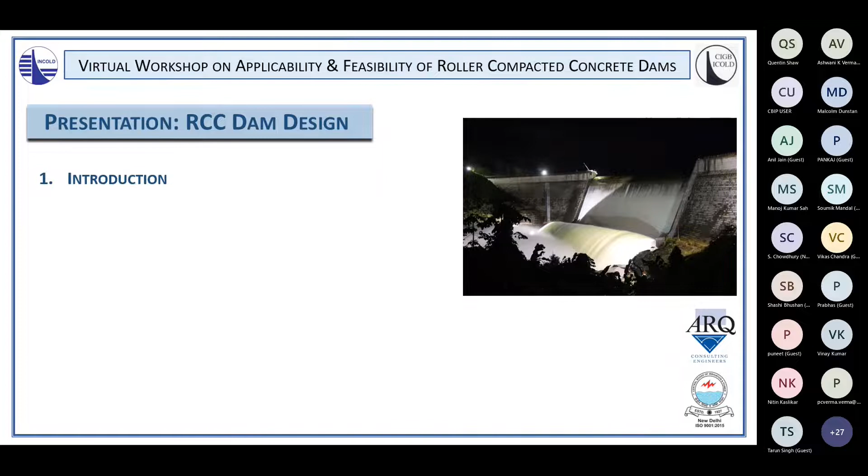My name is Quentin Shaw, and as part of the INCOLD virtual workshop on applicability and feasibility of roller compacted concrete dams, this afternoon I'm going to be presenting to you on the subject of RCC dam design. So I will start the presentation with an introduction and go on to talk about different types of RCC and different RCC dam types. I'll then talk about the critical properties for different RCC dam types and then move on to talk about the very important subject of thermomechanical analysis of RCC dams.

And I'll expand this theme to talk about stress relaxation creep, thermal effects, and temperature load issues for RCC dams, looking at the critical impacts of low stress relaxation creep in arch dams and the impacts of stress relaxation creep in gravity dams. I'll then look at developing this concept to then describe and underline the correct approach for stress relaxation creep thermomechanical analysis of RCC dams.

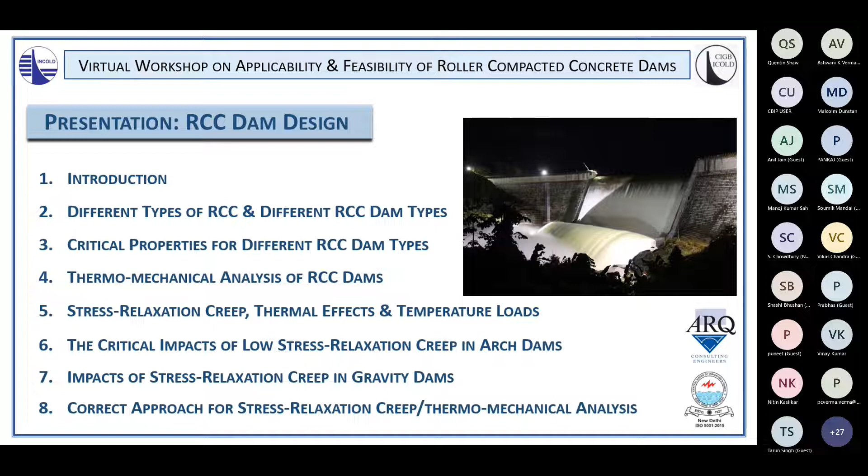We'll then change the theme a little bit and look at the important differences between RCC and conventional mass concrete dam design. And to extend the subject that I introduced earlier, I'll look at differing RCC requirements for different RCC dam types. Then go on to talk about facing systems for RCC dams, the different options. I'll look at describing in principle RCC arch dams, and then I'll bring everything together and present a summary of the success factors in RCC dam design and a general summary of the full presentation in its entirety.

An RCC dam is a type of concrete dam which requires more detailed consideration of materials and construction procedures than is the case for a conventional mass concrete dam. And it also requires a consideration of additional issues and parameters in the process of design.

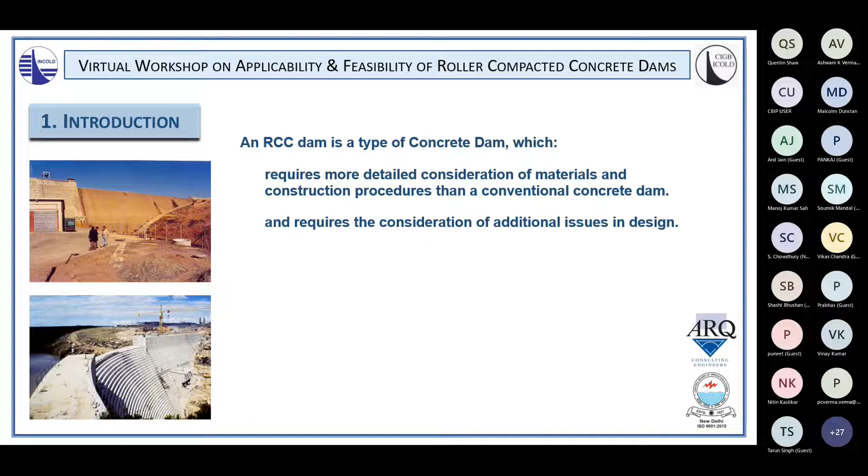So RCC dams were first built as a complete dam in the early 1980s, and by 2021 more than 900 major RCC dams were in existence worldwide, of which 83 are arch dams, so that's a little less than 10%. And of these 83, 72 are in China and 11 in the rest of the world, which includes South Africa, Panama, Puerto Rico, Laos, Pakistan, Algeria, Lebanon, Honduras, and Turkey.

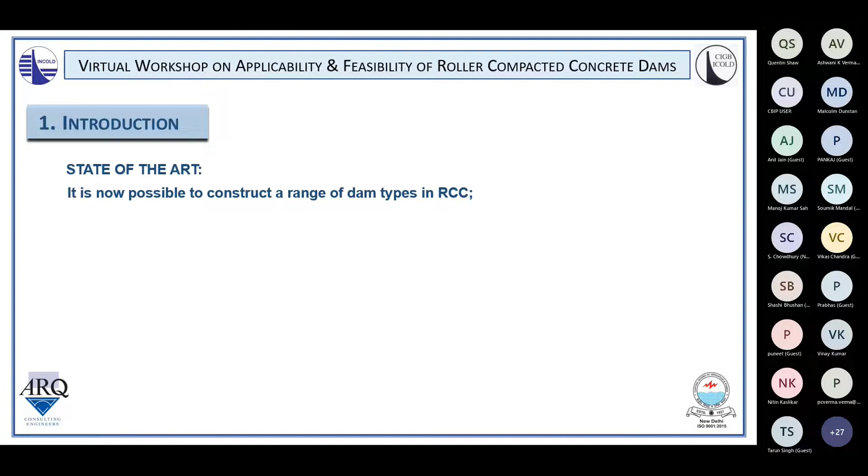In terms of the state of the art of RCC, it's now possible to construct a range of dam types in roller compacted concrete, from the low stress hard fill gravity structures, where one might typically be working with a concrete with a compressive strength of the order of 2 to 4 MPa, although usually in fact higher, all the way through to arch gravity and even thin arch dams, where the compressive strength of the concrete can quite easily be as high as 40 megapascals.

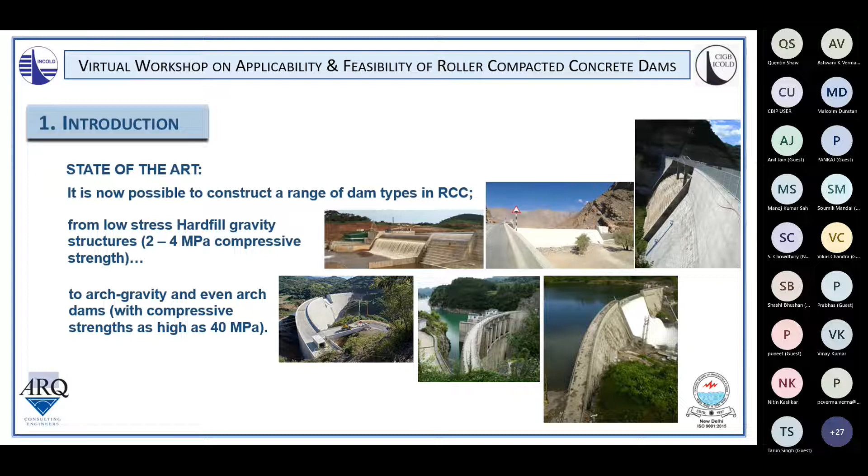And while it is true to say that RCC technology has probably reached a certain level of maturity, it's equally true to say that the technological development in RCC remains ongoing. And while this series of presentations as part of this training workshop relate primarily to Bulletin 177, there are certain aspects, particularly of this design presentation, that relate to developments since Bulletin 177.

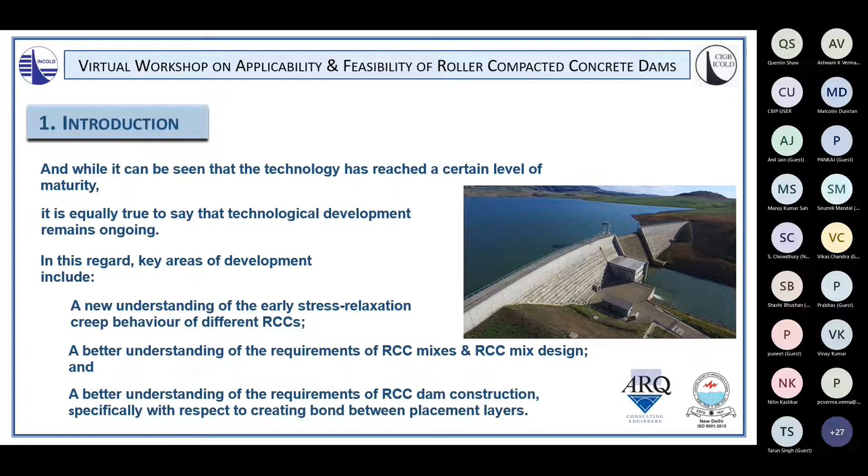So in this regard, the key areas of development in RCC include a new understanding of the early stress relaxation creep behavior of different RCC types, a better understanding of the requirements of RCC mixes and RCC mix design, and a better understanding of the requirements of RCC dam construction, specifically with respect to creating bond between placement layers.

So whereas it is true to say that the concrete strength and zoning may differ for conventional mass concrete dams of different height and for different loading conditions, the primary configuration of the structure and the method of construction remains the same. This, on the other hand, is not the case for RCC, for which quite different concrete characteristics can be created, which imply different structural forms and even different construction requirements and approaches.

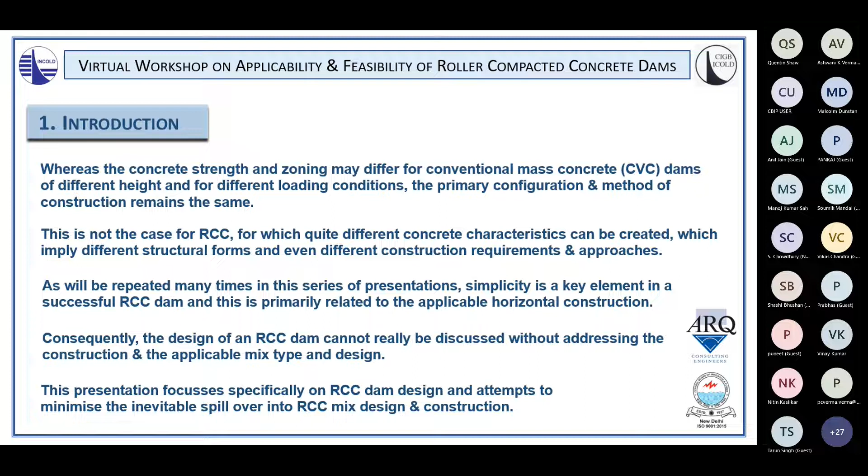So as will be repeated many times in this series of presentations, simplicity is the key element in a successful RCC dam, and this is primarily related to the application of horizontal construction. Consequently, the design of an RCC dam cannot really be discussed without addressing the construction and the applicable mix type and design. Now, this presentation specifically focuses on RCC dam design and attempts to minimize the inevitable spillover or overlap into RCC mix design and construction, although you cannot really talk about any one of these subjects without realistically addressing and including the impacts of the others.

So with RCC types of different composition and strength, different structural dam types are applicable. Starting at the bottom end, the lowest cementitious materials end, for symmetrical section hard fill or CSG dams, or as they're now called cemented materials dams, a very low cementitious material content can be used, as low as 60 kilograms a cubic meter. Realistically, this is the sort of material that was the origin of roller compacted concrete dams, and the symmetrical hard fill configuration was at that very origin as well.

Realistically, this was a hearting material with very low strength requirements. And a zero bond between the placement layers is a critical factor of this type of roller compacted concrete. And impermeability must be created by a separate element on the upstream face. Now, this mix type will give a zero vertical tensile strength, and consequently the dam type is not realistically suited to regions subject to high seismicity.

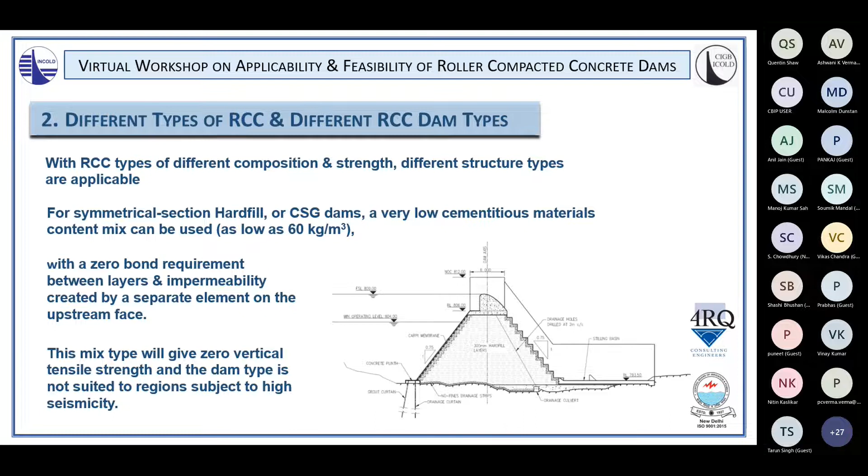The next step on the cementitious materials scale is low cementitious RCC, or LCRCC, which is an RCC containing less than 100 kilograms per cubic meter total cementitious materials. And mixes of this type can typically take two forms. A more modern variant will indicate a very high non-cementitious fines content with a total paste content of between 210 and 240 liters per cubic meter.

And in this regard, it's particularly important to understand the differentiation between cementitious paste and total paste. In modern RCC dams, total paste is the critical element. Cementitious paste involves cementitious materials, water, admixtures, and air, while total paste is the cementitious paste plus the non-cementitious fines that come from either crusher sand or manufactured dust, milled rock.

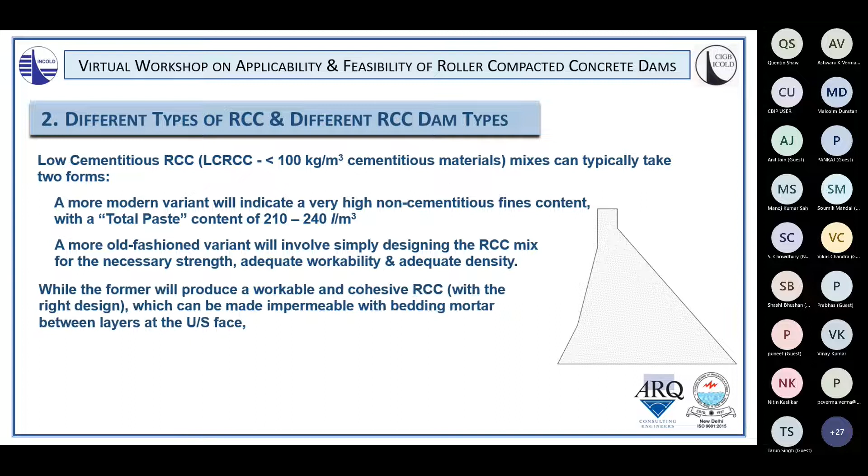On the other hand, there's a more old-fashioned variant of LCRCC, which will involve simply designing the RCC mix for the necessary target strength, adequate workability, and adequate density. While the former RCC type will produce a workable and cohesive mix with the right design, which can be made impermeable with bedding mortar between the layers in the zone of the upstream face, the latter will typically produce a mix that segregates during construction and will require a separate upstream membrane or element for impermeability. So in all cases of LCRCC, a broader dam section and a lower stressed structure is required.

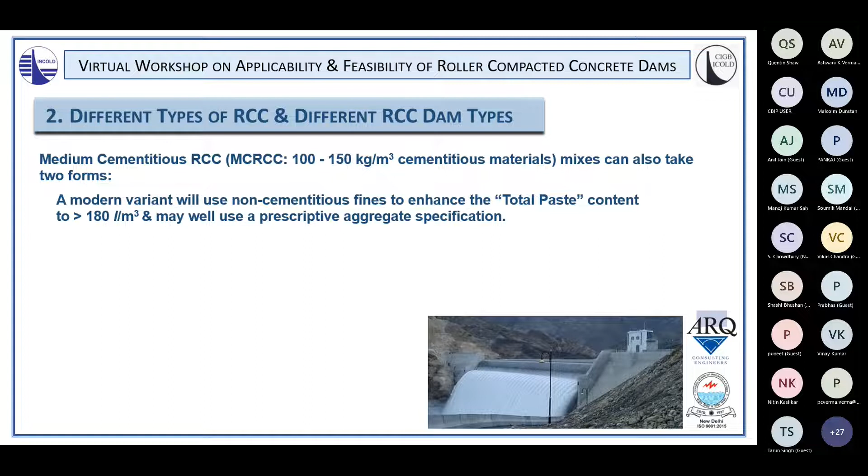And next we come to medium cementitious RCC, MCRCC, which is a mix containing between 100 and 150 kilograms per cubic meter of total cementitious materials. And this can also take two forms. A modern variant will use non-cementitious fines to enhance the total paste content to somewhere in the region of 180 liters per cubic meter, with this low level of paste requiring a prescriptive aggregate specification. And then you have the more old-fashioned variant again, which involves designing the RCC mix for the necessary strength, adequate workability, and adequate density.

Now, due to the improved understanding of RCC mix requirements, the use of the former mix type is increasing and the latter type is decreasing, with the former producing workable, impermeable RCC. However, a limitation of this RCC type is that it will not realistically allow high levels of interlayer bond. Tensile strengths are not really much more than 1 MPa and cohesions not more than 1.25 MPa. Consequently, this RCC type is best suited to lower stressed gravity dam configurations.

Then at the top of the scale, we have high cementitious RCC, HCRCC, which is a mix containing more than 150 kilograms per cubic meter total cementitious materials. These mixes typically take a single form, a high workability, cohesive mix with total paste content greater than 180 liters per cubic meter, and often using a prescriptive aggregate specification. Without that specification, the total paste requirements are somewhat higher.

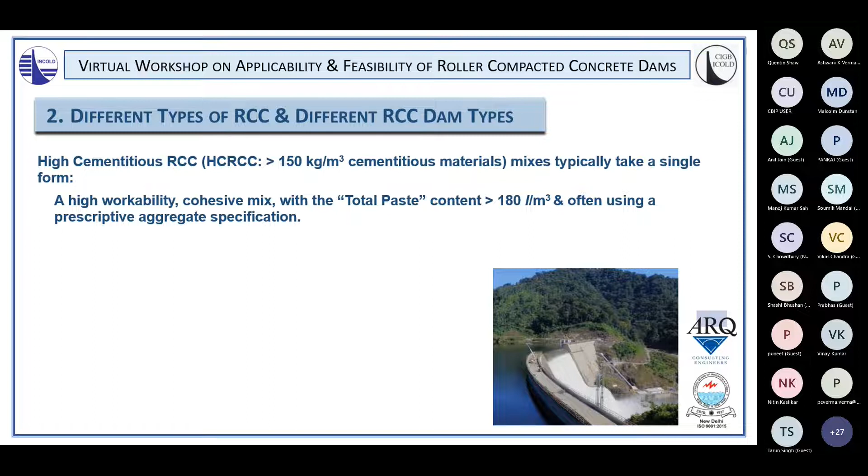And usually a set retarding admixture will be used to extend the initial setting time of this type of RCC to approximately 24 hours. And the concrete is then described as a super retarded high workability RCC. This approach allows a maximization of hot joints, which maximizes interlayer bond.

And even so, a design limitation exists in a maximum sustainable vertical tensile strength of the order of 1.5 MPa, which can be compared to a number of over 4 MPa for a conventional mass concrete. Nevertheless, this type of RCC is suited to higher stress structures, including arch dams, but also offers constructability benefits. So in some instances, this RCC type is selected because of its constructability advantages and because of its good bonding

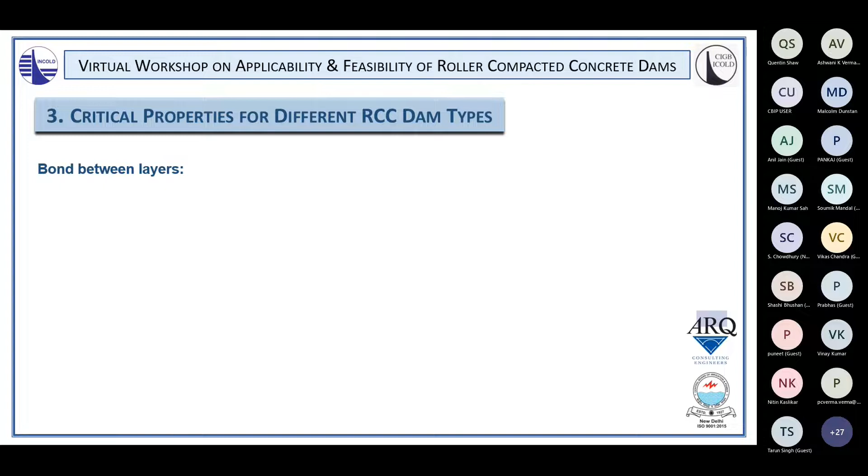between placement layers. And if we look at the critical properties for different RCC dam types, the first critical property, or the overall property, is the bond between the layers, and this in the form of tensile strength, shear strength, particularly joint cohesion, and permeability. So this really defines our bond between the successive placement layers.

And when we're talking about the typical properties that can be realized for each of the RCC types that define the criteria for the design of the different RCC dam types, we can look at these following properties, although we have to say that it's always necessary to verify these properties through testing. So what I'm going to give you here are just typical ranges of applicable properties.

So when we're looking at hard fill, at the low cementitious end of the spectrum, realistically a tensile strength between layers of 0, a shear strength, depending on the nature of the aggregates particularly, of between 37 and 50 degrees, and realistically a cohesion of 0. Permeability, you have to expect permeability along the joints between layers in a hard fill type of structure.

So with low cementitious RCC, we have a situation with tensile strengths typically assumed as 0 where no bedding is used, and maybe as much as 0.5 MPa at the top end when bedding might be used. Shear strengths will typically be friction angles of between 37 and 50 degrees, and cohesions between layers would not realistically be more than 1 MPa, and that number could be as low as 0 when debonding between layers is observed. This will give you a permeable RCC matrix unless bedding is included between the placement layers, in which case impermeability can be created.

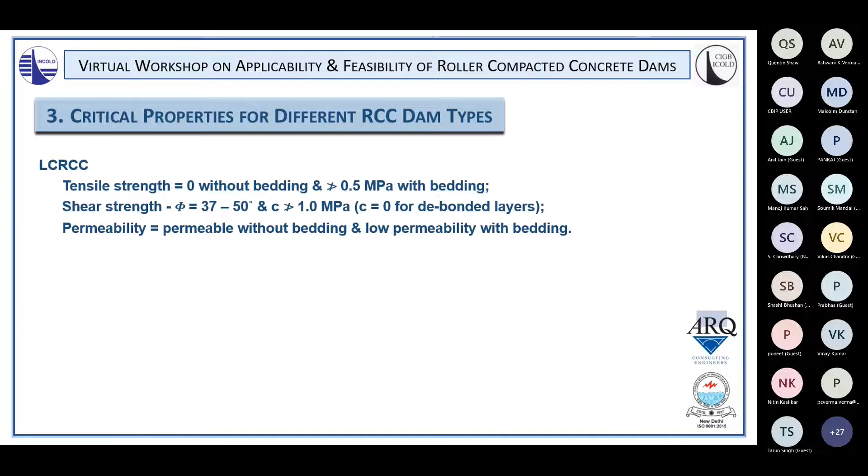The medium cementitious RCC, tensile strengths between typically 0.3 and 1 MPa, depending on the mix approach and the use of bedding between layers. Shear strengths for this with friction angles of the order of 40 to 50 degrees, and cohesions limited to perhaps 1.25 MPa. On the older type of this mix, you'd be looking at partly permeable, and realistically you wouldn't be able to be certain of impermeability without a bedding layer between the placement layers, but a modern mix can be designed in this type of RCC for impermeability.

The top end, the high cementitious RCC, tensile strength, as mentioned, realistically a maximum of 1.5 MPa, and this will depend again on the mix type, the amount of paste, etc., and the use of bedding. Shear strengths typically between 40 and 50 and even more friction angle, and cohesion of more than 2 MPa. And this type of RCC will be designed generally for impermeability.

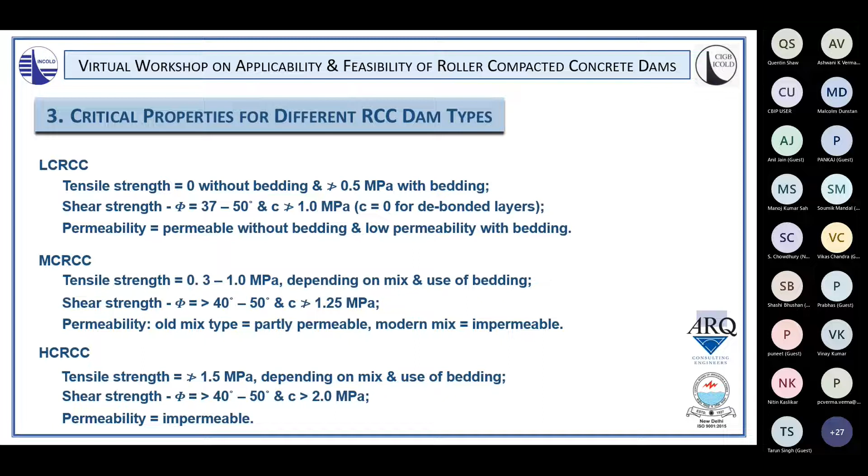Now, a particular issue that has some relevance to our RCC dam design is guidelines that have been written into the ANCOLD 2013 guideline on the design criteria for gravity dams. And while these aren't necessarily applicable anywhere outside Australia, it's extremely interesting to see that a fraternity of dam engineers have placed these requirements and constraints on particularly low cementitious RCC.

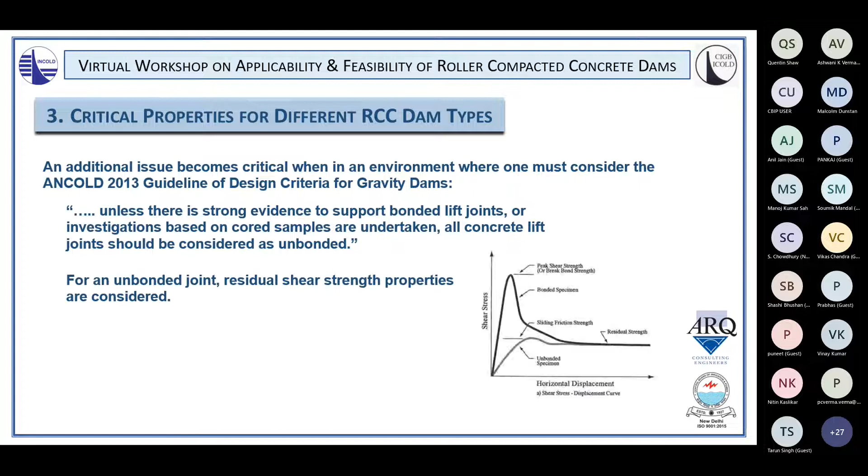And these state that unless there is strong evidence to support bonded lift joints or investigations based on core samples are undertaken, all concrete lift joints should be considered as unbonded. And for an unbonded joint, residual shear strength properties should be considered. Furthermore, the shear strength properties to be used should be exceeded by 80% of all test results. So these requirements imply the need for a very significantly heavier section in the case of a lower cementitious RCC dam, where a majority of unbonded lift joints can realistically be expected.

So this has a big impact because a lot of RCC dams will not have been designed with this principle in mind. So moving on to talk about a very important subject of thermomechanical analysis of RCC dams.

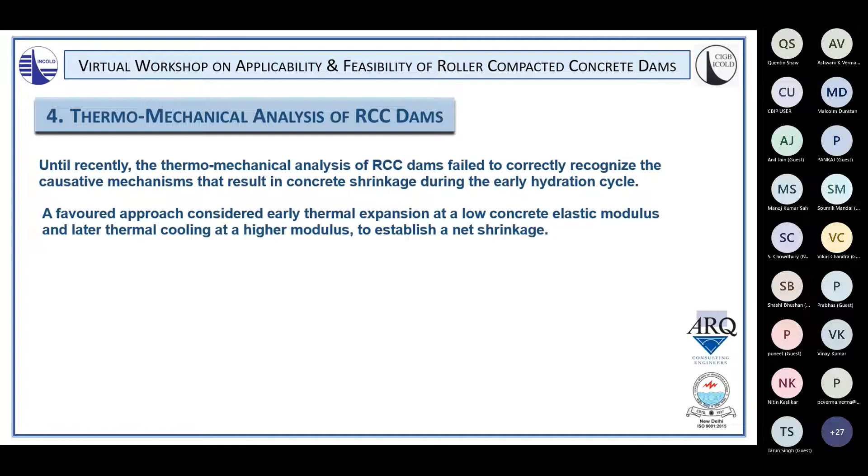Thermal expansion at a low concrete elastic modulus, and later thermal cooling at a higher concrete modulus, with basically the difference creating a shrinkage of that concrete. But this approach actually resulted in a misinterpretation of the actual behavior of the concrete. And stress relaxation creep that occurs during the hydration cycle was assumed to be a function of the nature of the concrete and the hydration temperature rise. And this was applicable essentially for all approaches used for the thermomechanical analysis of all concrete dams, essentially.

And in fact, it's been demonstrated that stress relaxation creep is a stress-dependent function. So it's not just dependent on the nature of the concrete, and it will be different with different natures of concrete, as in conventional concrete, roller compacted concrete, and roller compacted concrete with different cementitious materials compositions and contents. It will vary with that, but it's not so much the hydration temperature rise that influences the extent of stress relaxation creep, but rather the extent of restrained thermal expansion. So stress relaxation creep during that hydration process is actually a stress-dependent function. It's not a temperature-dependent function. It's about thermal expansion and how much that thermal expansion is actually restrained from occurring.

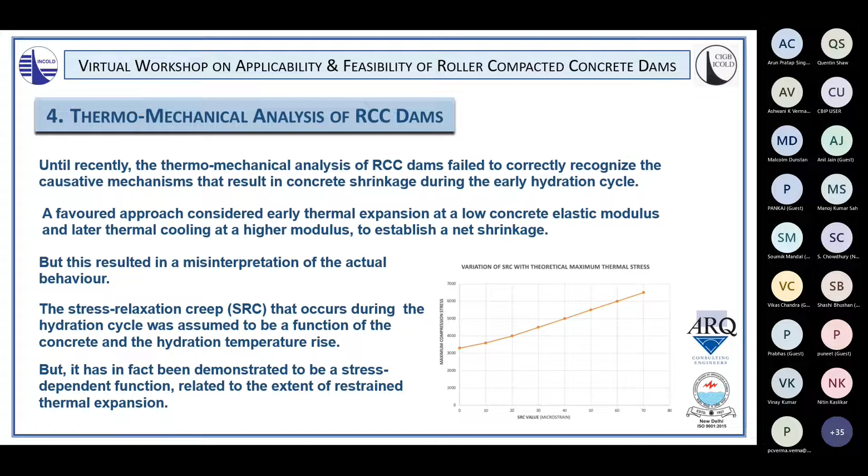So looking now at stress relaxation creep, thermal effects, and temperature loads, research and analysis on a number of RCC dams, including, importantly, 2 arch dams, revealed very different levels of stress relaxation creep in different RCC types. From an effective 0 stress relaxation creep on 2 arch dams, and notice the point effective 0, I'll explain that later. So from 0 on 2 arch dams to well in excess of 100 microstrain in the case of lower workability, low cementitious RCC. And this is particularly relevant because this RCC might have had an adiabatic hydration temperature rise of the order of 7 to 8 degrees. So in fact, even more than the temperature equivalent of the hydration temperature rise was seen in the stress relaxation creep in this particular low strength RCC type.

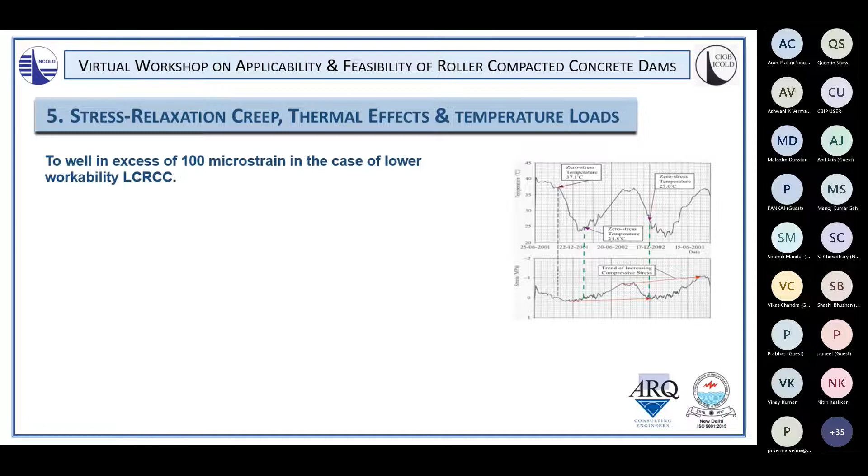Additionally, very low stress relaxation creep was demonstrated to increase surface gradient at cracking. Now this implies that the generic approach that was developed, such as maximum thermal gradients of 20 degrees between internal and external zones, was developed for conventional mass concrete on the basis of the typical performance of conventional mass concrete. What we're seeing in RCC is different: in low stress relaxation creep RCC, a greater sensitivity to these gradients exists. However, unlike conventional concrete, when a crack occurs in the surface of an RCC dam, that crack doesn't tend to propagate upwards. In conventional concrete, it does. It's very difficult to stop that crack. In the case of RCC, placing a warm RCC on top of that crack typically seals it again, and the problem of propagating cracks doesn't occur.

Particularly low stress relaxation creep was established in fly ash rich, high workability RCC, to the extent that expansion during construction was actually measured at Changuinola 1 dam. So the graphics shown here were measured at strain gauges across the joints at an elevation approximately 10 meters below the crest level, a little bit more, and on the upstream side, so several meters from the upstream face. What was established was that for the placement above those gauges, a linear expansion on those gauges was determined, which occurred until the horizontal construction was completed. So in other words, at the level of the spillway crest, it just stopped and disappeared.

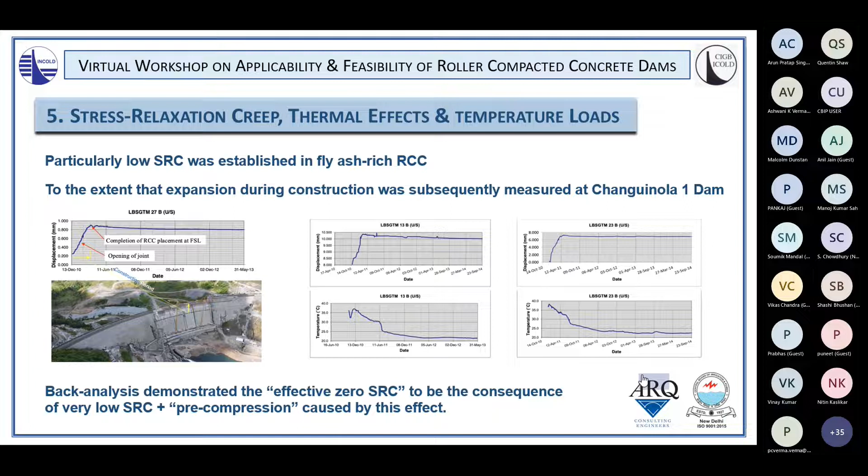So for the continuous horizontal construction above for the non-overspill crest, there was none of this expansion. It only occurred as concrete was placed fully from abutment to abutment horizontally. It happened linearly and stopped. And to the extent on those gauges of indicating an expansion on the upstream side of the order of 72 microstrain.

And back analysis demonstrated the effective zero stress relaxation creep that was seen in these arch dams is actually a consequence of, first of all, very low stress relaxation creep and this pre-compression effect with the actual arch crest getting longer. So it's a combination of these two things, low stress relaxation creep and this pre-compression of the crest getting longer as it's being built. And in fact, that only happens because of the low stress relaxation creep. So as the structure becomes more flexible with height, its containment of the thermal expansion is less, and therefore it is actually physically able to expand. So because of the low stress relaxation creep, you get this combination of two things that give us this overall effect of zero stress relaxation creep.

So what is stress relaxation creep? Well, let's start looking at this with our typical temperature time curve for concrete in the core of a dam structure. So we have our T1, which is the placement temperature, T2, the maximum temperature during hydration, T3, which is the zero stress temperature, and T4, which is the final coldest temperature during an equilibrium cycle after all the hydration heat has been dissipated. So the tricky one here is our T3.

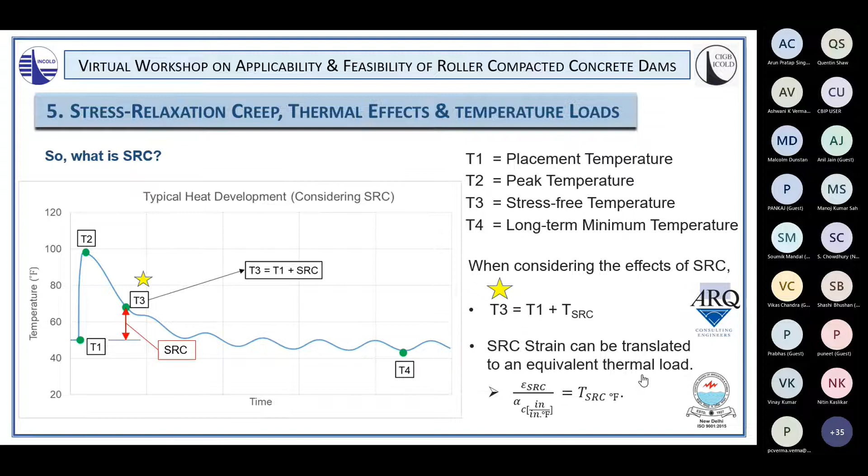creep. And when I say SRC, stress relaxation creep strain can be translated to an equivalent thermal load. So we have a temperature equivalence or a strain equivalence of that stress relaxation creep. Then let's look in more detail at stress relaxation creep.

So as cementitious materials hydrate, the product of the reaction is smaller in volume than the constituent components. So the product of the hydration gel is smaller than the cementitious materials and water, air, etc. that are the components of the reaction. And this is called chemical shrinkage. However, as the paste gains strength, not all chemical shrinkage translates into physical shrinkage. And the physical manifestation of the chemical shrinkage is seen as autogenous shrinkage of the mortar or the concrete.

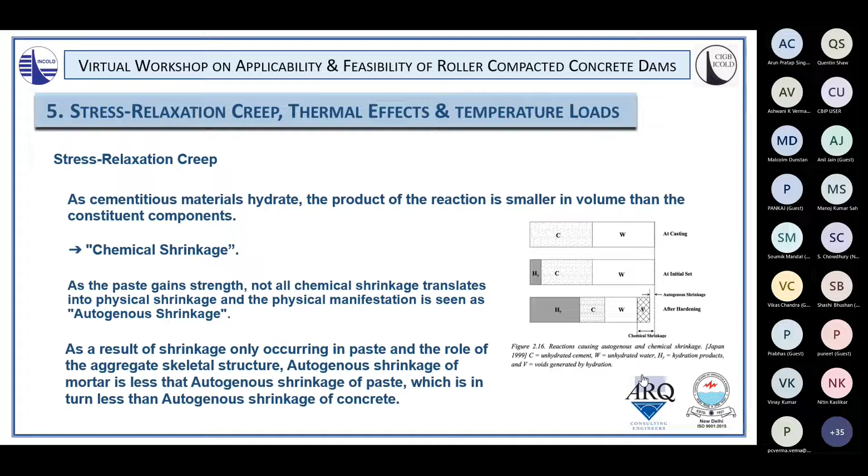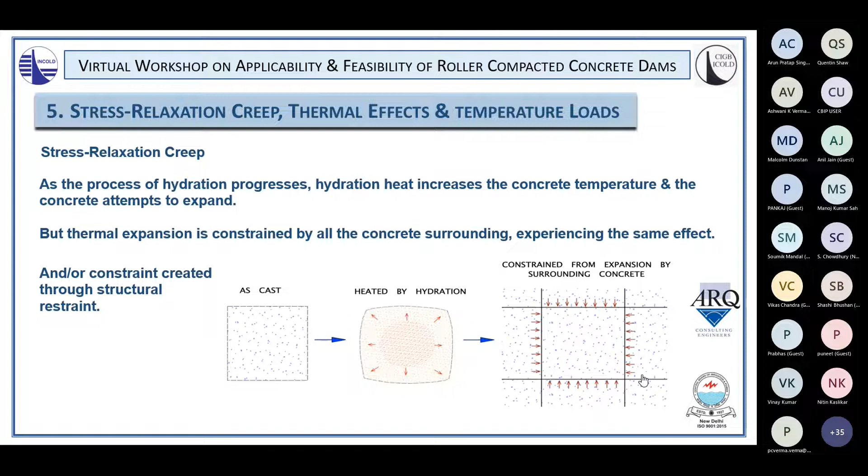So it's a completely different structural constraint up at the top of the dam compared to at the base, particularly in the case of an arch gravity dam. So let's look more deeply into the mechanism that is stress relaxation creep. So as concrete is expanding due to increased temperature, but is constrained by material doing exactly the same thing surrounding it, that concrete experiences compression stress.

Under this compression stress, the immature concrete experiences creep through which that compression stress is relieved or relaxed, and hence the name for this type of creep: stress relaxation creep. And one credible theory that has been advanced to understand what is happening in this process considers the fact that the immature concrete under compression experiences a situation where moisture is squeezed from the micropores in the paste into the macropores.

So these macropores are caused by chemical shrinkage and autogenous shrinkage. The difference between the chemical shrinkage and the autogenous shrinkage takes the form of macropores being created within the paste. And as that paste then experiences compression, moisture from the micropores is squeezed into these voids that are the macropores, and in that process, the paste within the concrete structure collapses a little bit and relieves the compression stress that it's otherwise experiencing, and in the process shrinks.

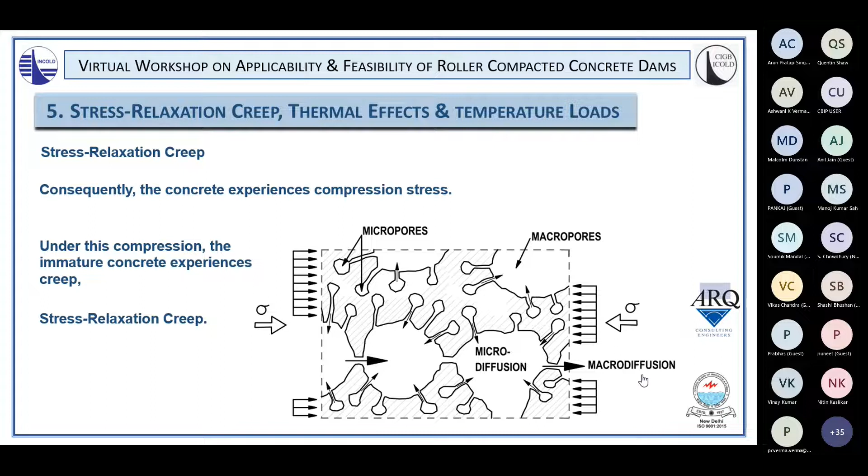And now if we look at stress relaxation creep in relation to roller-compacted concrete, in terms of the structure of the concrete, and particularly a higher workability RCC, the process of compaction under roller action really involves squeezing the aggregate skeletal structure together and releasing paste up to the surface. This is very different and results in a very different skeletal structure compared to conventional mass concrete. One picture that I use to describe this difference is imagining conventional concrete as aggregate in a soup of paste, whereas RCC is a skeletal structure of aggregates with paste in between. And the lower paste content and better developed aggregate skeletal structure that you get in roller compacted concrete through the action of roller compaction implies workable RCC is less susceptible than conventional mass concrete to autogenous shrinkage and early age stress relaxation creep.

So from one side, because the problem that happens in autogenous shrinkage, etc., is in the paste, and because there is less paste in an RCC than is the case with most conventional mass concretes, there is less actual direct effect of the autogenous shrinkage, number one. And number two, because the skeletal structure is better established through roller compaction, the overall structure of RCC is less susceptible to the stress relaxation creep that would more easily occur in conventional mass concrete.

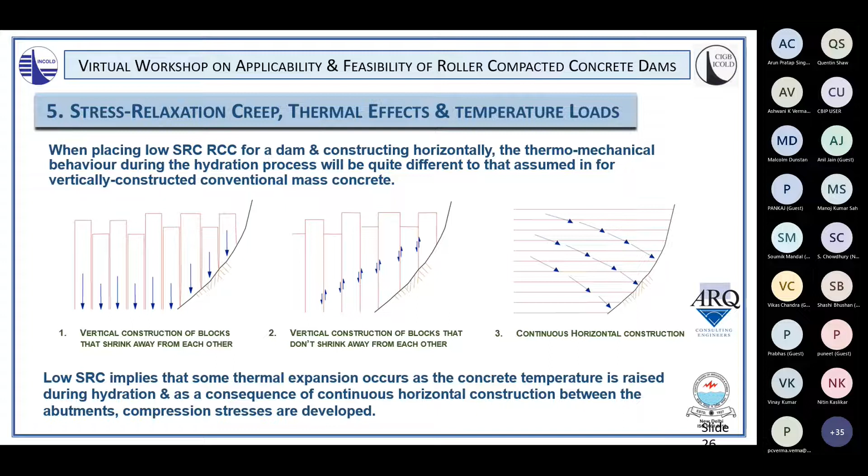Now let us look at the impact of low stress relaxation creep, starting specifically with arch dams. Due to the natural configuration of an arch or an arch gravity dam, the arches become longer and thinner in section with increasing elevation, and accordingly increasingly flexible with height. So the structure of a dam at its base, in terms of lateral stiffness, will be much stiffer than is the case right at the crest of the dam. Not only at the bottom is the length and width more similar, so we've got a squarer block, but we've got the restraint of the foundation. As we go further up, the dam structure becomes longer and thinner, and remember, any expansion will tend to push the dam upstream.

So even the rigidity of the arch against load in a downstream direction is not applicable, because we're actually working with forces that will increase upstream movement. So the dam becomes much more flexible with height, and consequently expansion due to thermal temperature rise increases with height, causing the structure to lean progressively further upstream and resulting in the arches effectively, and in reality, being constructed progressively longer with increasing dam height.

And this effect is equivalent to an extension of the arch at the crest level, on structures of between 70 and 100 meters in height, of the order of 50 to 70 microstrain, which implies that 50 to 70 microstrain of thermal shrinkage can actually happen in that arch crest before it effectively experiences any temperature drop load.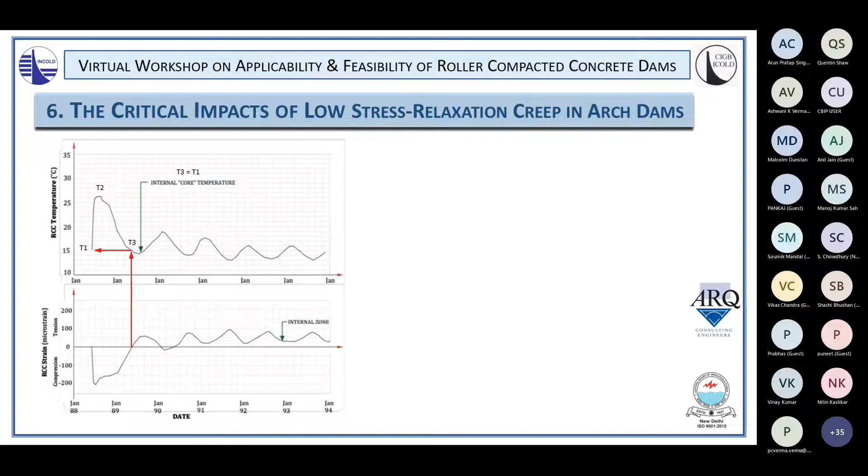Now, as can be seen on these graphs from the Knellpoort Dam, the strain passes through zero at the point that the temperature T3 is pretty much the same as T1. So our T3 is equal to T1. And remember back to our earlier curves, where in conventional concrete dam engineering, T3 is in fact equated to T2 rather than T1. And bearing in mind that our stress relaxation creep is equal to T3 minus T1, if T3 is equal to T1, that means we have a situation of zero stress relaxation creep.

And the final mass gradient structural temperature drop load will obviously then be substantially lower, essentially being T3 or T1 minus T4, rather than what would effectively have been in conventional concrete dam engineering, T2 minus T4. A very important structural difference in terms of temperature drop load on this dam type.

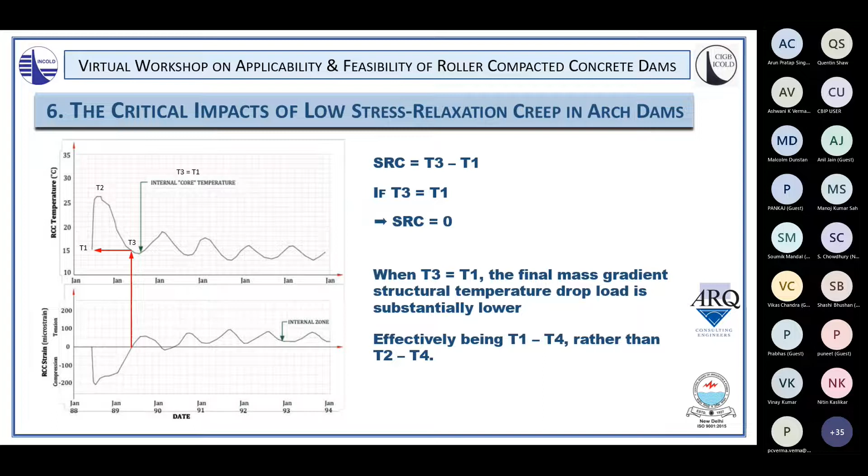Illustrating this point again, just for clarity, we have our graph T1, T2 and T4. For conventional concrete, our T3 is either set at T2 or a degree or two below T2. So our total temperature drop in a dam with grouted joints is large, being approximately T2 all the way down to T4. Now, if our T3 is substantially lower, equivalent to T1, then it becomes very evident that the long-term structural temperature drop load on the dam is much, much lower.

And it's very relevant to make a statement in terms of understanding of how arch dams work. In these situations, in the winter temperature loading, the displacements downstream associated purely with temperature from a cold winter are typically pretty equivalent to the maximum displacements related to the water load. So we can see that these effects are quite large. And with this reduction of the T3 value, it's very obvious that we're creating very strong opportunities for RCC arch dams whereby we do not need to grout joints.

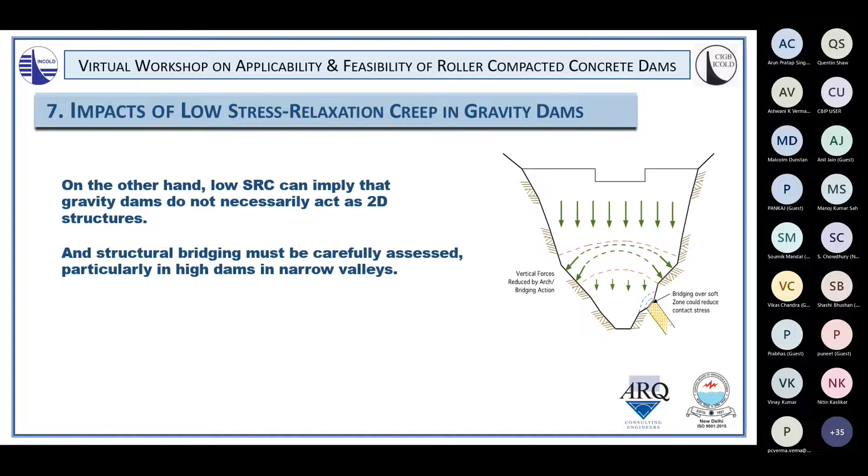Now moving on to what this means on gravity dams. So great opportunities in terms of arch dams, but negative effects in terms of gravity dams, because low stress relaxation creep can imply that gravity dams do not necessarily act as two-dimensional structures. Structural bridging must be carefully assessed, particularly in high dams in narrow valleys, or where zones of weak material are present in the foundation, because literally we create a bridge across those zones and potentially don't have a contact pressure between the dam and that foundation in these places.

That contact pressure can be less than the hydraulic pressure, and if we have an erodible material on a contact, this can obviously result in very serious erosion beneath the dam. Consequently, analysis requires very careful structural evaluation of the dam structure under gravity and thermal loading. So our thermomechanical analysis must very carefully consider the process of construction and subsequent loading.

Without a benched foundation on a steep abutment with a lower strength rock mass, the extremes of the dam may slide down as the hydration heat is dissipated. What would normally happen in a gravity dam is that each of the blocks would carry their own load vertically and they will shrink away from each other. But because of the thermal expansion that we have and the low stress relaxation creep, we actually create a situation where we lift our dam. So the top piece that we're putting on is sort of stretched over this lifted area. And as that lifted area cools and shrinks back down, it will pull the sides of the dam down the abutments. So those flanks of the dam must be designed to be stable on their own abutment.

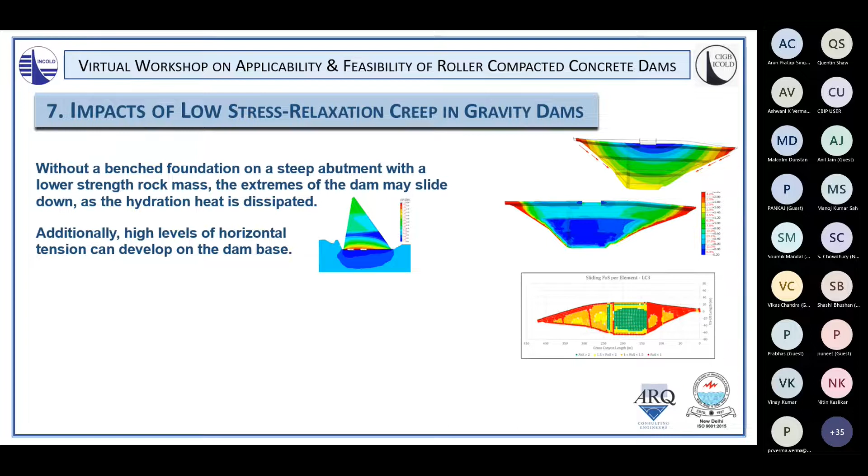Additionally, on a lower deformation modulus foundation, higher levels of horizontal tension will develop along the dam base. It's very similar to the concept of a rigid beam on a flexible foundation. It can be necessary to bench the foundations and provide distinct joint systems to ensure debonding of all of these joints. Not so much in the central and lower section of the dam, but in the upper abutments. And this must be looked at very carefully in even the design of gravity dams.

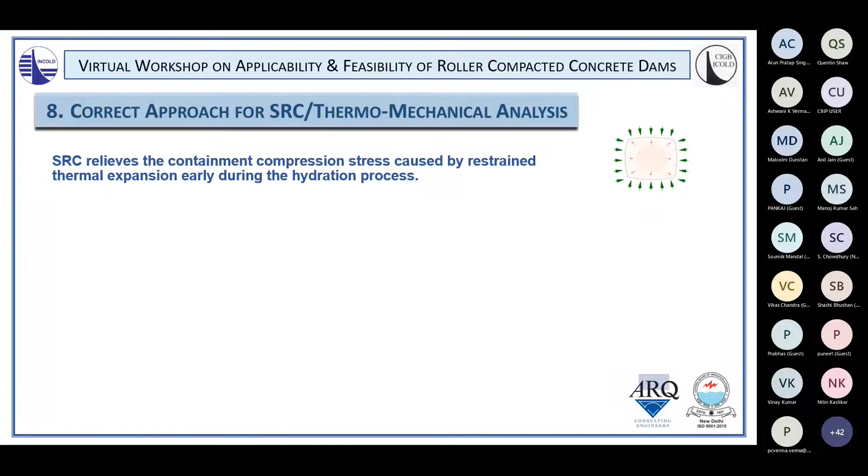Now, raising all these issues about stress relaxation creep and thermomechanical analysis, we need to really talk about what is the correct approach for stress relaxation creep and thermomechanical analysis. Stress relaxation creep relieves the containment compression stress caused by restrained thermal expansion early during the hydration process. Creep can only occur once the hydration process creates micropores and macropores in the gel to allow the migration of moisture. Until that point, it's basically like compressing a fluid.

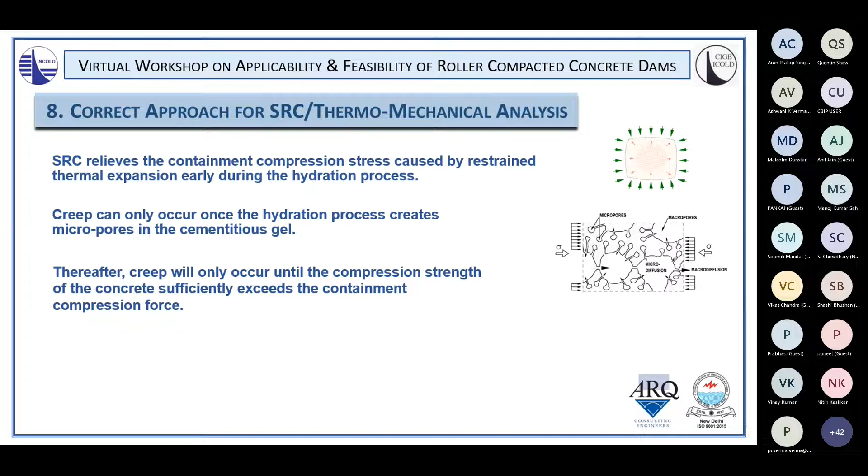But thereafter, creep will only occur until the compression strength of the concrete sufficiently exceeds the containment compression force. In the same way as autogenous shrinkage is a lesser form of chemical shrinkage, which stops once the paste has sufficient strength, a similar effect will occur in the stress relaxation creep in concrete. Once the concrete has gained sufficient strength, it will be able to resist those compressive forces and the creep will not continue. So at the beginning of the hydration process, the RCC will act more like a contained liquid, and only as the hydration gel shrinkage occurs, simultaneously with thermal expansion, will the susceptibility to stress relaxation creep start to develop.

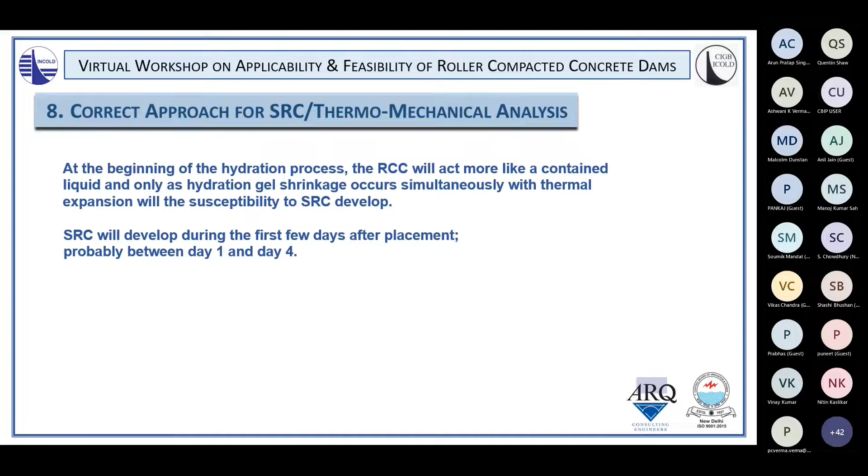Stress relaxation creep will develop during the first few days after placement. This is probably something that happens between day 1 and day 4, obviously depending on the particular mix, but it's occurring in this very early period. Determining the temperature rise on the 4th day throughout an entire dam structure and establishing the associated compression stresses at those points would be a very complicated and complex exercise. For a typical fly ash RCC, the temperature rise at day 4 has been demonstrated to be consistently plus or minus 65% of the maximum hydration temperature rise, whether that be adiabatic or under conditions of some exposure of the surface.

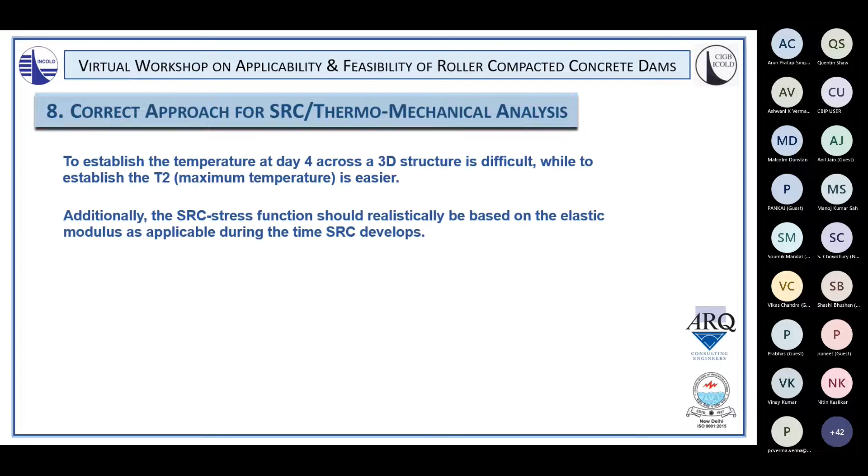In view of the fact that establishing temperatures at day 4 across the entire dam structure is very difficult, it's much easier to establish the maximum temperature at the peak of hydration, the T2 temperature. Additionally, the stress relaxation creep function should realistically be based on the elastic modulus applicable during the time the creep develops, but this is again a very difficult, or not necessarily realistic, thing to determine or model. However, using a stress relaxation creep function based on the temperature rise, T2 minus T1, and the mature elastic modulus of the RCC, a realistic stress relaxation creep curve was developed to produce a realistic response within a three-dimensional arch structure. This demonstrated the nature of the stress relaxation creep function that was applicable, basically working with a prototype structure where we understood the response in the different parts of the structure.

So we were able to back analyze what this would look like on the basis of just using the T2, the maximum temperature, and the mature elastic modulus. So this isn't an absolute curve that defines when this happens, this is the response. It's an approximation that allows us to use the simplified information of T2 and mature elastic modulus.

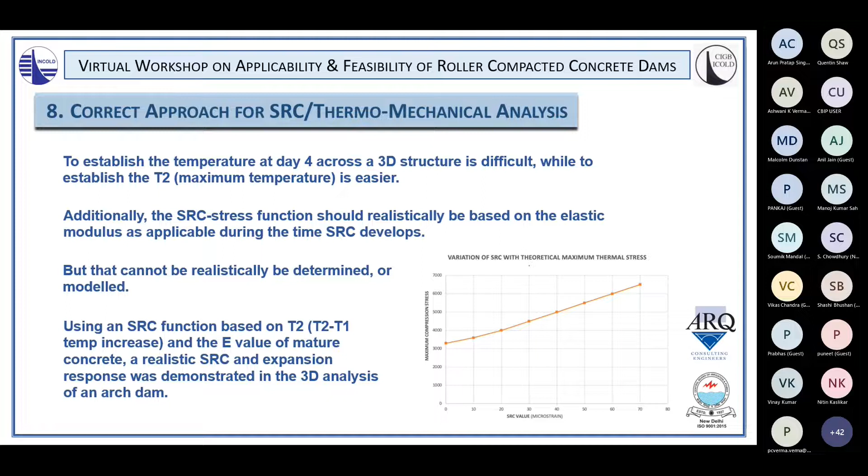And the stress relaxation creep curve must be used basically then to reduce the compression stress in an iterative manner until a balanced situation of compression stress and stress relaxation creep is established. So at the T2 temperature, which is not a state of time, it's a state of temperature, throughout the whole structure, we look at what are the containment compression stresses throughout the structure. We look at them, we plot them onto this curve of compression stress against stress relaxation creep. We pick off a value, we put this back into the analysis system at every single node of the structure,

and we iterate it again, because once the stress relaxation creep has gone into the model, it reduces the compression stress and therefore picks itself a lower value of stress relaxation creep. So we have to iterate this a couple of times to get to a point where we've got a balance between the applicable compression stresses and the stress relaxation creep. But through this iteration, we end up with a full picture of the stress relaxation creep distribution node by node throughout the three-dimensional dam structure.

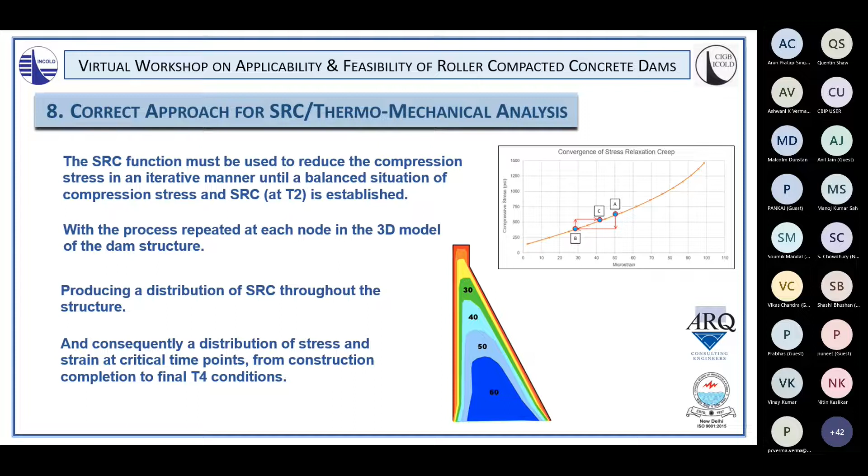And very typically, we'll see a picture where we have higher levels of stress relaxation creep in the lower parts of the dam structure, reducing with height, again not simply related to the dimensions or the temperature rise of the structure, but significantly related to the level of flexibility of the structure higher up. And this gives us then a situation, we have a distribution of stress and strain at the critical point in time, and from that condition, we can then derive what are the stresses and strains in the structure at any subsequent point forward until full dissipation of the hydration heat at the T4 conditions.

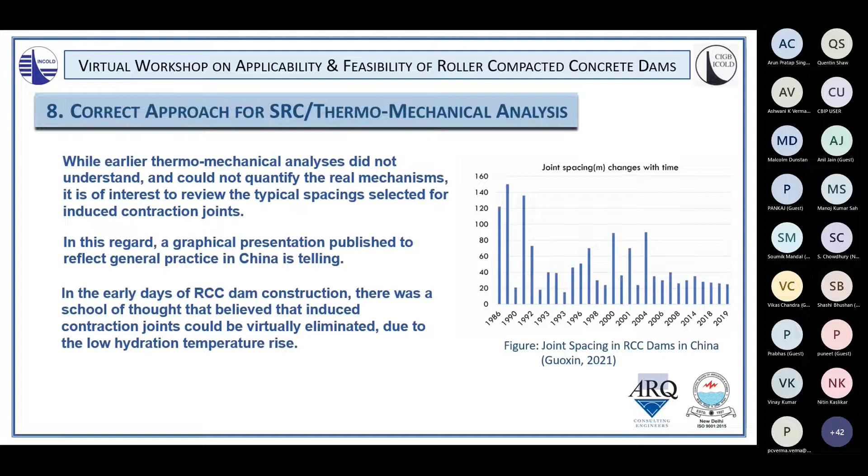So while earlier thermomechanical analysis didn't understand and could not quantify the real mechanisms that were occurring, the real stress relaxation creep mechanism, it's of interest to review the typical spacings selected for induced contraction joints over history with RCC dams. And in this regard, a graphical presentation published recently of Chinese experience is very telling. So in the early days of RCC dam construction, there was a school of thought that believed that induced contraction joints could virtually be eliminated in RCC dams due to the low hydration heat rise. But practical application has demonstrated that a joint spacing of between 20 and 35 meters is realistically optimal.

The induced joints aren't expensive, it's a question of balancing what is needed, what is sensible, and what is practical in a real situation. And while this number, 20 to 35 meters, will depend on the climatic conditions, the dam height, and the founding conditions, it's very interesting to note that this is something that now is being accepted across all RCC dams, even though the actual theory behind it is not proven. It is more about practical experience that's demonstrated this to be the right answer.

So now let's move on to look at the important differences between roller compacted concrete and conventional mass concrete dam design. So for gravity structures, the design of an RCC dam has generally followed the same approach as is applicable and was developed for conventional mass concrete dams. But realistically, there are two significant differences between RCC and conventional mass concrete that must be considered in the process of design.

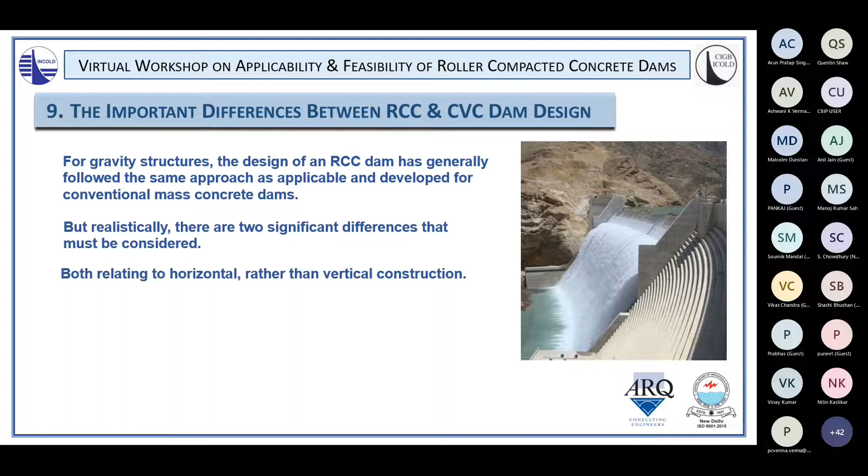Both of these effects are related to horizontal rather than vertical construction. And the first difference relates to low stress relaxation creep in combination with horizontal construction. If we consider that our contraction joints, our induced joints in RCC dams, are not formed but induced and typically aligned with a tolerance of plus minus 50 millimeters, and that 50 millimeters is not realistically an upper level of tolerance. It's a practical reality that we probably are constructing with a realistic deviation of 50 millimeters one side and 50 millimeters the other side.

And this implies that we have vertical and horizontal alignment of our induced joints that varies by 100 millimeters, effectively creating vertical and horizontal shear keys in our RCC. And if we look at Indian Standard 6512, which is the criteria for design of solid gravity dams, this states that when adjacent cantilevers are of differing height, load will be transferred laterally and by shear between blocks unless the contraction joints are neither keyed nor grouted.

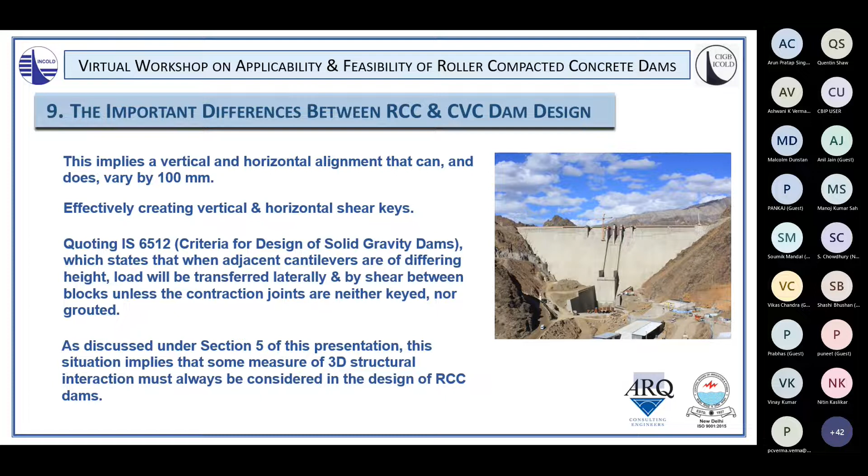So we have to consider now three-dimensional issues in our gravity dams in the case of RCC. As I said, it may be possible to dispel them as not significant, but they must at least be considered. The second difference between RCC and conventional mass concrete is the need for simplicity in RCC dam design. Simplicity in form to allow simplicity and consequently speed of construction.

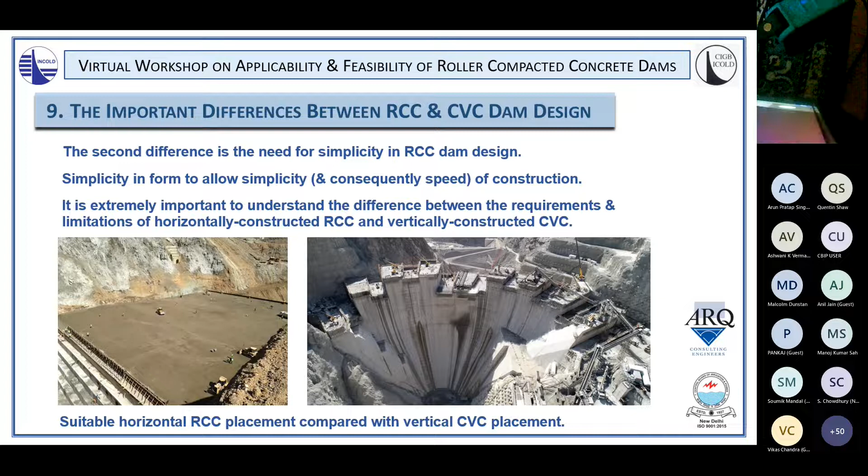That is not the case in an RCC dam. It's quite the opposite. So as soon as you put anything in the middle or anywhere in the structure and you're constructing horizontally, that will interfere with your placement process, and consequently anything that does get included there has to be very rapidly constructed. Nowhere is an understanding of this requirement more important than in the design of inlet-outlet works. Get it wrong and you can easily get a situation where the tail wags the dog.

This slide provides a very strong indication. The RCC on this particular dam took twice as long as it should have, because the entire construction was determined by the design of the inlet outlet works. Clearly the wrong thing to do for an RCC dam. This is a misunderstanding of the requirements of the design of an RCC dam.

Get it right, however, and it's very easy to accommodate inlet outlet works in an RCC dam, with the primary principle being that whatever is included, it doesn't affect the RCC placement. So the RCC placement simply continues up and over and above whatever is taken through the structure. But it is essential to recognize that in the design. And as an example, just rationalizing the design of the outlet works at the Spring Grove Dam in South Africa reduced the entire dam construction program from 28 to 19 months.

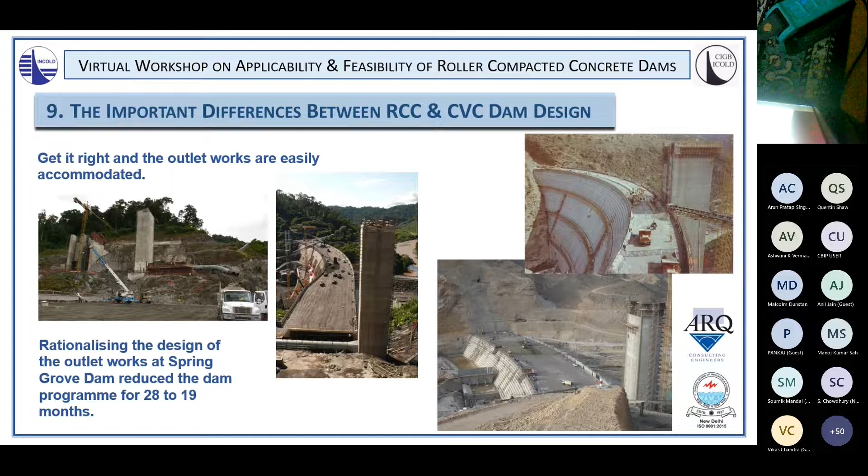So it wasn't changing the function of the inlet outlet works, it was just rationalizing the arrangement, applying the thinking that the construction must be designed in tandem with the RCC arrangements. That basically made it possible to reduce the construction program of the dam by approximately 1/3. And we're talking 1/3, and that's the sort of thing that can actually have an economic effect on the project. So it's not just about a lower cost construction, it's about bringing the project online sooner and having an economic benefit, a return on capital sooner. It's an extremely important principle.

So spillways can also slow RCC dam construction. And where you have a very simple traditional stepped spillway on an RCC dam with energy dissipation on the steps and in some sort of apron or other at the bottom, it has very little effect on the placement. But when you're looking at a system of higher capacity, where you can't dissipate over the steps, higher concentration of flow, or when you're dissipating energy at the crest. In these two cases, you can quite easily get into a situation where it significantly slows down the construction.

And that may not be a problem in cases where you've got a dam that's going to take 1.5 years to fill, for example. But at the Changuinola 1 dam, which was filled from empty to full in 33 days, obviously it was very significant to ensure that the spillway was available immediately on completion of the structure. And consequently, the construction of the spillway was designed to lag the RCC placement by just 2 weeks.

And consequently, there was no restriction. The spillway had no impact. But in other situations, it's quite easy to make that mistake and slow the date of impoundment down by the type of construction used for the spillway. The impact related to spillways is much higher on an RCC dam than is the case on a conventional concrete dam.

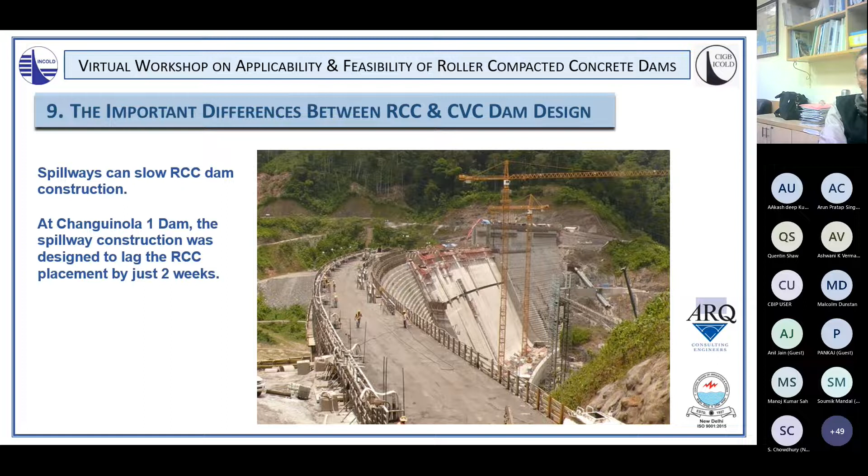So all inclusions in RCC incur an impact on the achievable RCC placement rates. And sloped galleries can be particularly problematic. And I could talk to you for probably at least half an hour on what you see in these pictures, but suffice to say that never mind the design problems that are associated with this situation, it is a problem in terms of construction scheduling, and it's substantially better to use systems of horizontal galleries and vertical shafts.

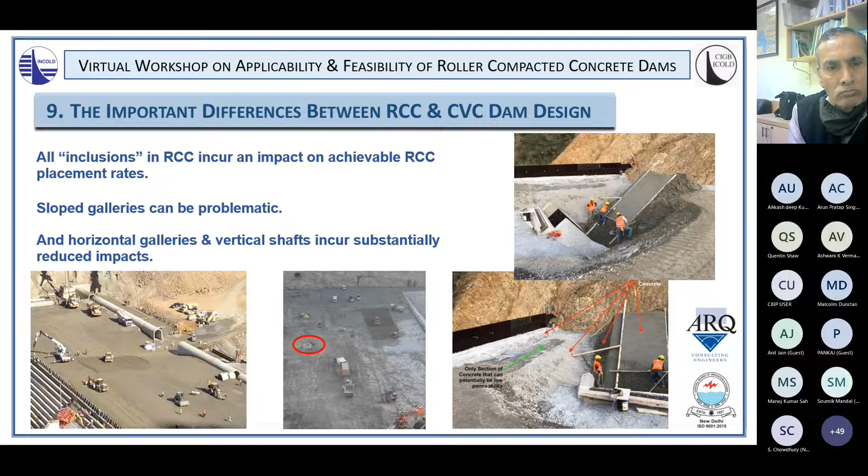Obviously, these need to be looked at very carefully to make sure operational conditions are still okay. The impact on uplift need not be at all significant, but from a construction point of view, this type of system is substantially better. And while a precast inverted U gallery form may not be the cheapest on paper, in terms of its benefits in construction speed, it is definitely the best system to use on an RCC dam.

Okay, so let's look at the differing RCC requirements for differing RCC dam types. And we spoke about this initially earlier in the presentation. RCC mixes will be discussed in detail under a separate presentation. So I'm not going to go into the details of RCC mixes or how the design thereof works, but it was considered worthwhile to emphasize the respective influence of these different mixes and the related requirements in relation to dam design. In earlier RCC development, there was talk of the geotechnical and the concrete approaches to RCC mix design.

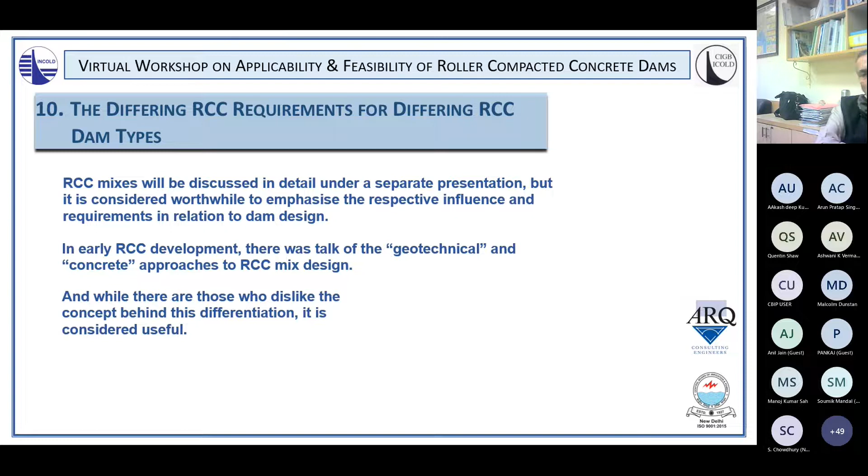And that was not received well by certain people, but from my perspective, it's quite a useful way to think, and it's a useful way to create a differentiation in thinking of how these concretes actually, in their hardened states, how they actually work. And in its hardened mass form, an RCC will act as something between a stabilized fill from the geotechnical point of view, all the way to an absolute solid monolithic concrete. So these options exist from one all the way to the other in RCC.

We're not restricted. There isn't one solution. There's not one just weaker or stronger type of concrete. We have a completely different system of concrete with, as I say, at the lower cementitious end, something more like a stabilized fill where we have heterogeneous layer profiles and all this sort of thing, all the way to a very, very homogeneous and solid concrete where you cannot really differentiate any weaknesses between layers and that, etc.

At the lower end of the cementitious scale, core drilling is notoriously difficult and simply cannot successfully produce meaningful cores for testing before an extended age. So you cannot design a concrete with very low cementitious materials, drill within a couple of weeks and expect to see what the strength, what the shear strengths of that concrete will be. And related situations have recently resulted in the particular dam being actually considered unsafe.

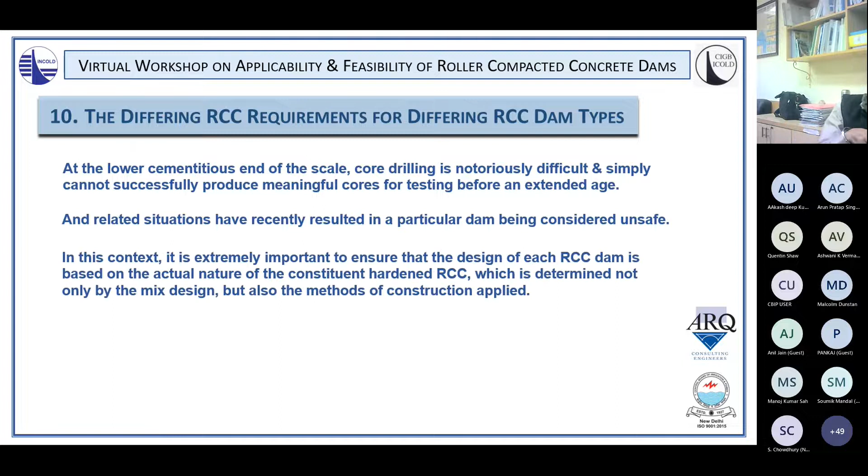And in this context, it's extremely important to ensure that the design of each RCC dam is based on the actual nature of the constituent hardened RCC, which is determined not only by the mix design, but also the methods of construction that are applied. So while hard fill construction may be very rapid and efficient, it's not appropriate to design a dam as an RCC gravity dam and to build that dam as a hard fill dam. And this has happened many times in RCC. There are many RCC dams that have been designed as gravity dams, but not really constructed with good enough materials for them to be gravity dams, more at the end of what would realistically be called hard fill.

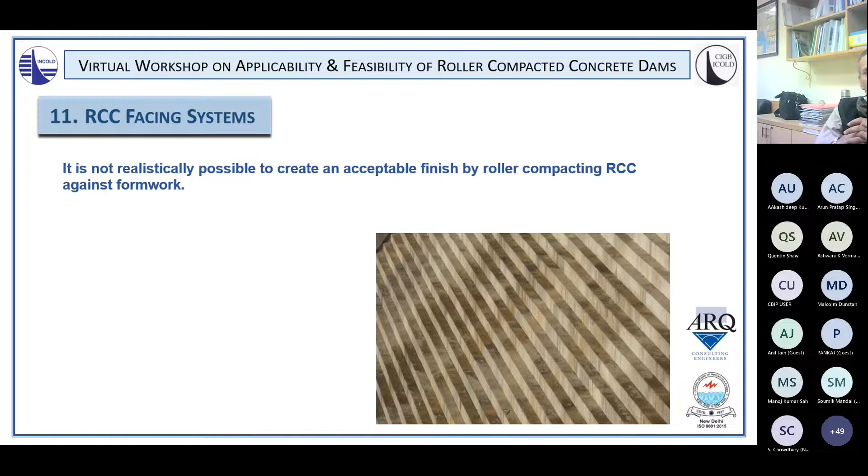So moving along to look at different facing systems for RCC. It's not really realistically possible to create an acceptable finish by roller compacting concrete against formwork on its own. And so different facing systems are available. And these include reinforced concrete or precast concrete panels, extruded concrete curbs, two forms of grout-enriched RCC, which I'll describe in detail, GERCC and GEVR, and then we have IVRCC, which is internally vibratable RCC. So this is RCC that can either be compacted with a vibratory roller or by immersion vibration.

Conventional mass concrete is often used as a surfacing to RCC, and there will be somewhere in all dam structures where conventional mass concrete and RCC interface at some point. Often the compaction at the interface between conventional mass concrete and RCC is poor, and consequently low strength and permeable material exists. Theoretically, a good bond between conventional concrete and RCC can be achieved when both RCC and CVC are compacted simultaneously.

However, the reality is that this is very difficult to do, and it's an ambitious objective to actually achieve. It interferes with construction quite considerably to have to actually do that.

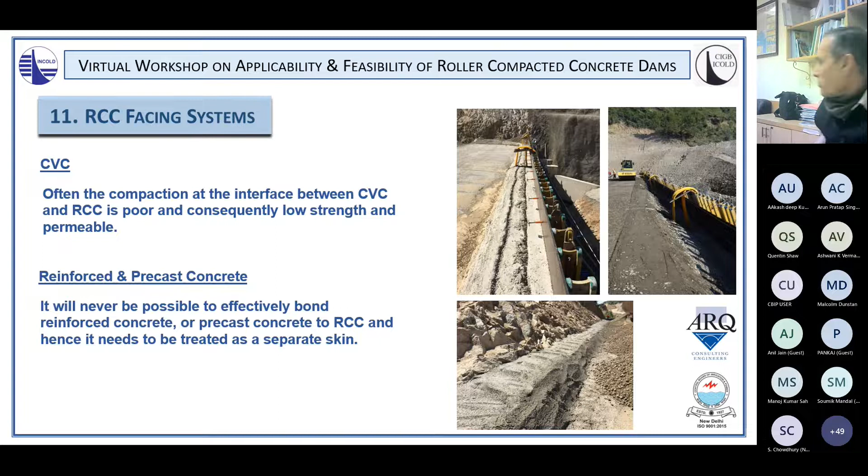Then we have reinforced and precast concrete panels, but it will never be possible to effectively bond reinforced concrete or precast concrete to roller compacted concrete, and hence it's usually necessary to treat that particular element as a separate skin, and often there will be a GE RCC or a grout enriched layer between the RCC and that precast element. The reinforced concrete or precast panel will also usually be constructed before the RCC, which in turn results in an inefficiency of the one before the other.

Extruded concrete curbs. This was quite frequently used in early RCC, however the extruded curbs must be constructed before the RCC, and they're therefore on the critical path, and they can only be realistically used for downstream faces because they can't be used to create impermeability. Similarly, there will be no real bond between this medium and the roller compacted concrete adjacent to it.

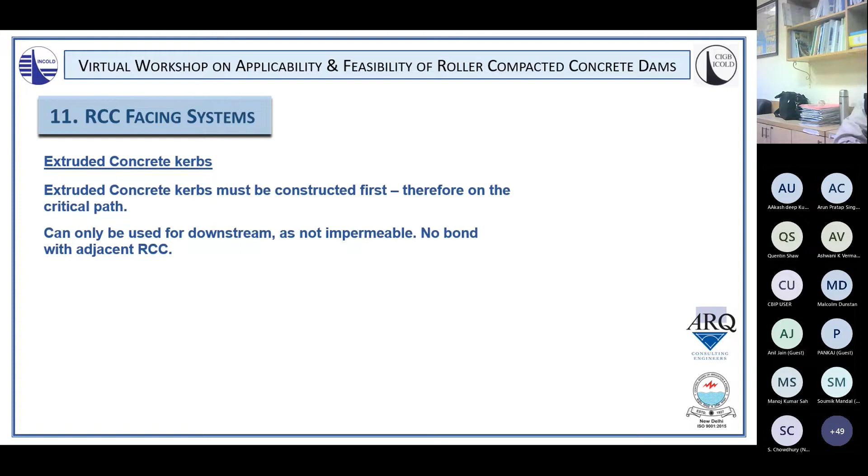Then we have grout enriched RCC, so this is GE RCC, and this involves putting grout into RCC from above, from the top of the surface layer. When developed, GE RCC represented the simplest and most effective and most technically appropriate method for forming the external face of an RCC dam. And with GE RCC, the operation of creating the skin is not on the critical path, which allows increased placement tempo while still producing a very good surface finish.

And with modern experience and development has shown that the right application can make GE RCC very effective, giving very continuous cores with no bonding issues between layers. The only problem with this type of enrichment is the necessity for a relatively high water-cement ratio to allow the grout to penetrate from above and therefore be flowable.

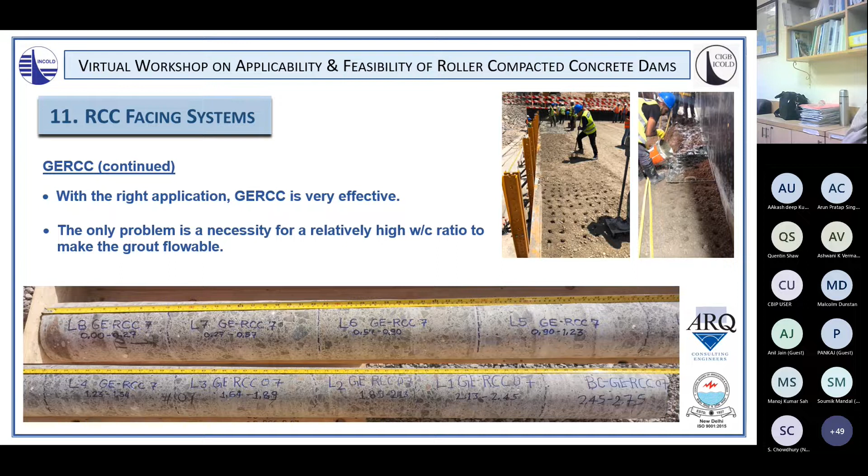Then we have GEVR, which is again a grout-enriched vibrated RCC, but the grout is placed at the bottom of the layer rather than the top of the layer. And this works better than GE RCC for high-paste RCC. It also has a better certainty of grout penetration, because whereas putting the grout on the top of the layer and vibrating, you can't see what's happening at the bottom of the interface of that layer and the previous layer. Whereas with GEVR, you are vibrating the grout up through the RCC. So when you see it on the top surface, you know it has penetrated through the entire depth of the layer.

You can use thicker grout, a 0.6 to 1 water-cement ratio is quite easy, which means that you can have higher strength and greater durability of concrete on the surface of the dam, which can be very relevant in particular instances. The negative side is that there is an additional activity on the critical path. It's necessary to make these ponds of grout ahead of the bulldozed RCC, and therefore there's additional preparation.

When the RCC being used is actually too workable and has too high a paste content, grout can rise up against particular inserts into the RCC, such as water stops and the formwork, and this can result in a thin grout film against certain elements, which can then shrink and crack and can increase permeability. It's just a question of only using the grout, or even the quantity of grout, establishing the quantity of grout on the basis of what the particular RCC requires, not designing it for a particular number or volume of grout.

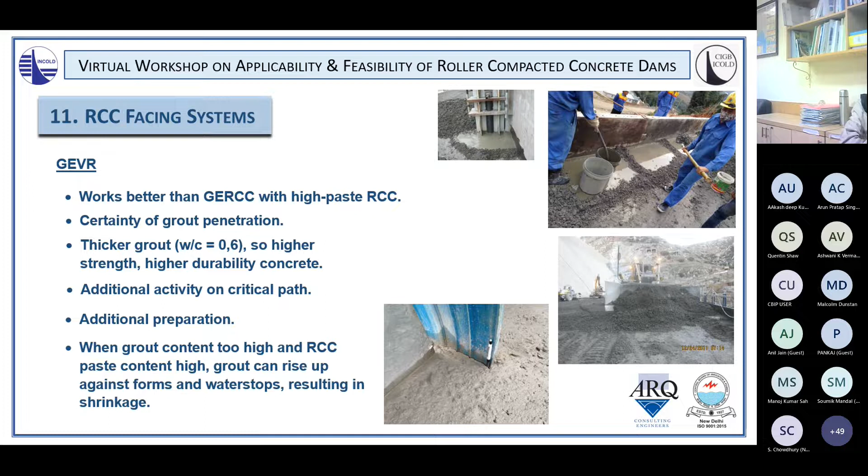Then we have IV RCC, which is the simplest system for forming the external face of an RCC dam. All activities involved are off the critical path. It creates good bond between the body of the RCC and the surface. It gives a good surface finish, but it requires a higher paste content and/or high workability aggregates, and so its use is realistically limited to super retarded and high workability, higher cementitious RCC. On the downside, compaction can sometimes be hard work, in which case it can actually be easier to add grout using GEVR and to increase overall construction efficiency.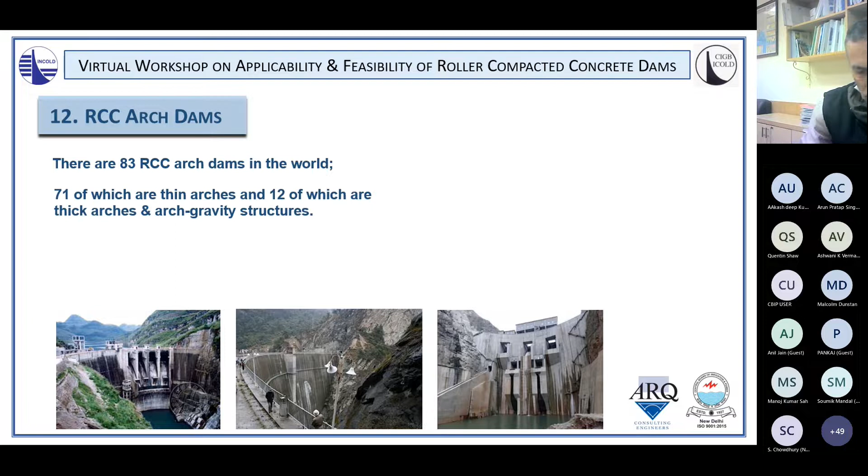I'm now going to talk briefly about RCC arch dams, and not in any real depth related to the design. But there are 83 RCC arch dams in the world, 71 of which are thin arches and 12 of which are thick arches and arch gravity structures. And the highest of these is the thin arch Wanjiakouzi Dam in China, which is 168 meters high. Almost 30% of all RCC dams in China are arch dams.

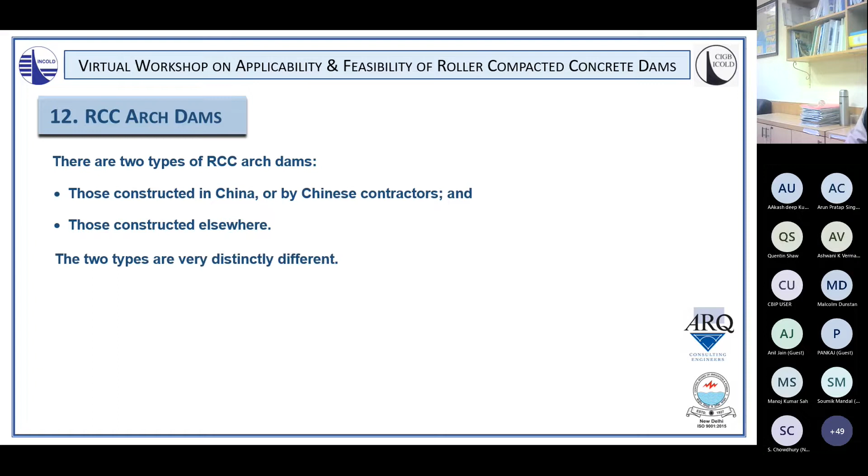And there are essentially two types of RCC arch dam. Those constructed in China or by Chinese contractors using the Chinese technology, and those constructed elsewhere. And the two types are very distinctly different. Modern Chinese technology RCC arch dams are essentially conventional concrete arch dams constructed in RCC. On the other hand, non-Chinese technology RCC arch dams are RCC dams designed to make use of three-dimensional structural function. It's quite a different concept.

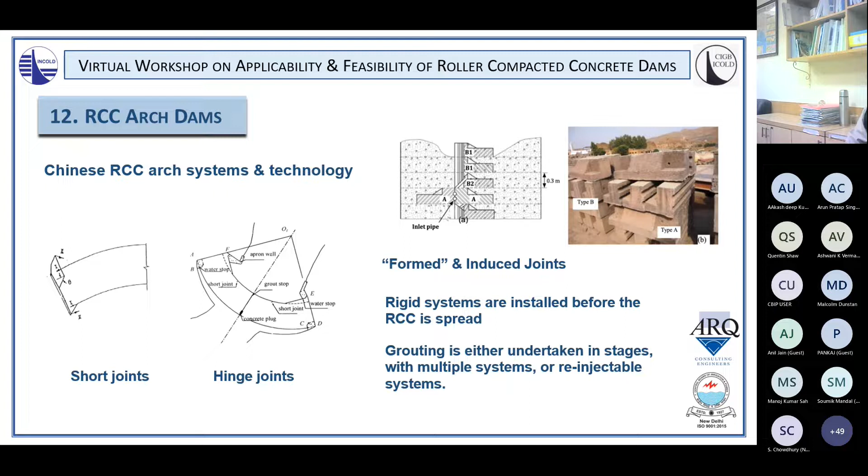Very briefly looking at the Chinese arch technology, which has involved joint systems to allow additional displacement, and what is called formed and induced joint systems within the RCC itself, which are actually rigid systems that are installed before RCC spreading, which has a huge implication in all sorts of ways, and particularly in terms of achievable construction speed. Grouting is either undertaken in stages with multiple systems or re-injectable systems. To look very briefly at other systems that have been installed at Changuinola 1, Kotanli, Kurulu, and partly at Gomal Zam Dam. And these have involved an induced system where a re-injectable grouting system has been included in certain places strategically where required, but with a modern trend away from this, the requirement to grout at all.

On the other hand, in more extreme climates, systems have been used where part of the dam has been pre-cooled, and to take advantage of the low stress relaxation creep effects that I've been talking about earlier. And this has meant that some limited pre-cooling and grouting has then allowed the structure to subsequently tighten itself over time. So usually what happens with an arch dam is it's grouted and it may need re-grouting as it loses some of its temperature. In fact, what has been done on these dams is that they've been grouted in a manner which allows the structure to tighten further during subsequent cooling, which has been very beneficial.

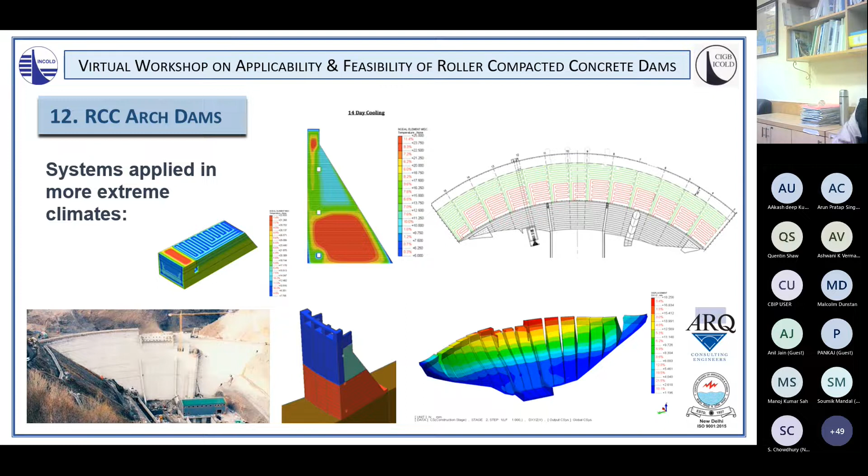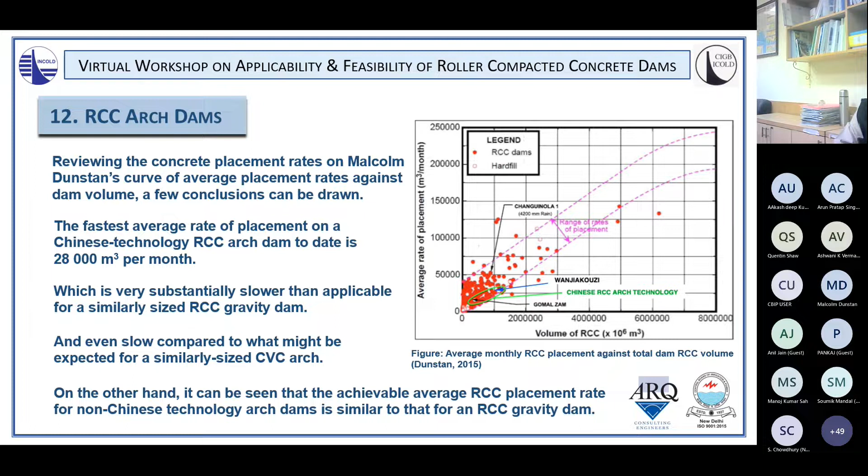So Chinese technology is more complex, slower, and generally requires post-cooling and more complex spillways, but will gain the benefit of between 5 and 20% less RCC than a conventional arch gravity RCC configuration. Non-Chinese technology has required, by the same token, between 5 and 20% more RCC, but can be constructed at normal high RCC placement rates and can impound immediately on completion without the need for post-cooling and grouting. Non-Chinese RCC arches do not need to adopt a traditional arch gravity form, but tend to be configured for maximum constructional simplicity and speed.

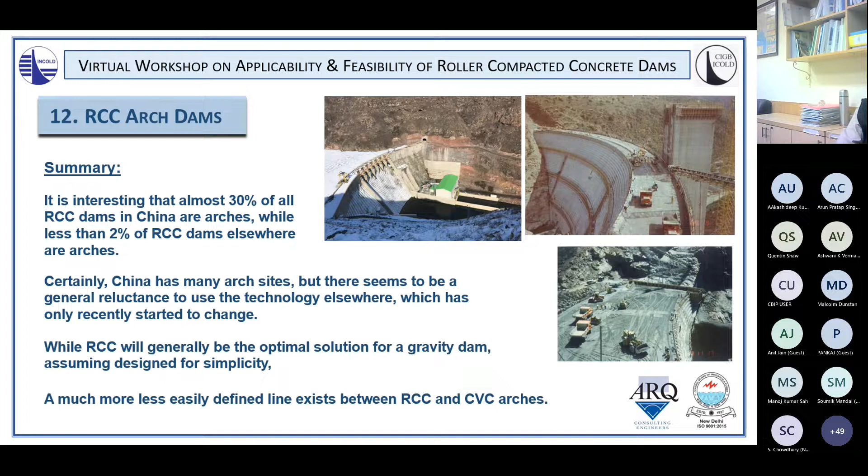And vertical construction becomes more efficient than horizontal construction on narrow dam sites with steep abutments for several reasons. Consequently, the most obvious place for RCC arch dams is on relatively wider sites, such as suit thicker arches or arch gravity configurations. And although there is certainly no need to restrict the structural configurations of arch gravity dams to vertical and constant inclination faces.

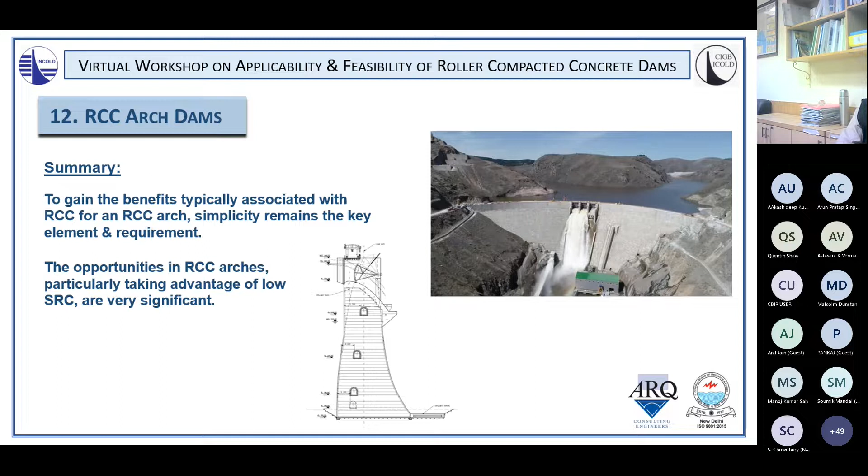To gain the benefits typically associated with RCC for an RCC arch, simplicity remains the key element and the key requirement. And the opportunity in RCC arches, particularly taking advantage of low stress relaxation creep, are very significant. So let's look briefly at the primary success factors in RCC dam design.

So, as a sort of a pre-summary, the success of an RCC dam is usually measured in the efficiency of its construction as well as its water tightness in operation. This success cannot, however, be achieved without the correct approach at the design stage. And efficient RCC dam construction is as much the dam designer's job as it is the contractor's job. The planning necessary to assure peak RCC efficiency during construction goes right back to the project feasibility stage and requires the involvement of RCC engineers who understand all of the requirements.

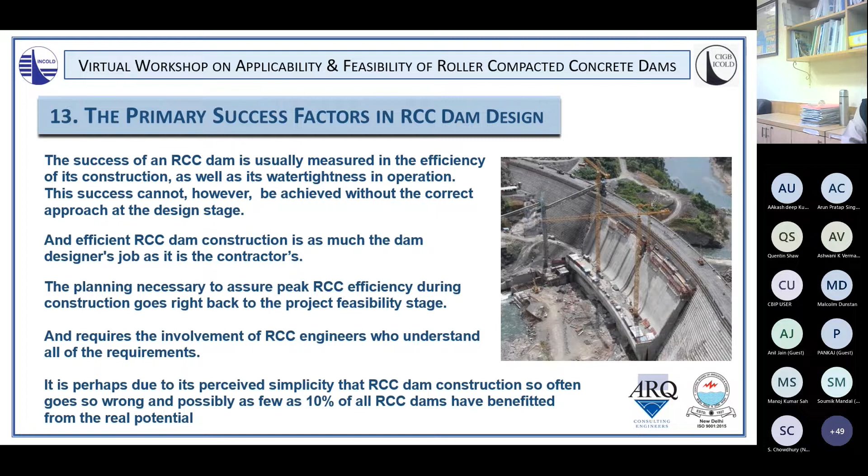It's perhaps due to its perceived simplicity that RCC dam construction so often goes so wrong, and possibly as few as 10% of all RCC dams completed to date have realistically benefited from the real potential of roller compaction. So, in summary, the presentation demonstrates the broad range of gravity and arched dam types that can be designed for construction using RCC. It further touches on the different RCC types associated with these different structure types, illustrating the range of RCC characteristics from a geotechnical material to a quality concrete that implies very different dam configurations, designs, and construction approaches, which related limitations are not always so well understood or respected.

A particular emphasis is made on the critical importance of good design for RCC dams, highlighting the fact that there are more things to take into account in the case of the design of an RCC dam than is the case for a conventional mass concrete dam. RCC is a medium with great flexibility, but for which good knowledge is required in order to take advantage of what each RCC type can offer.

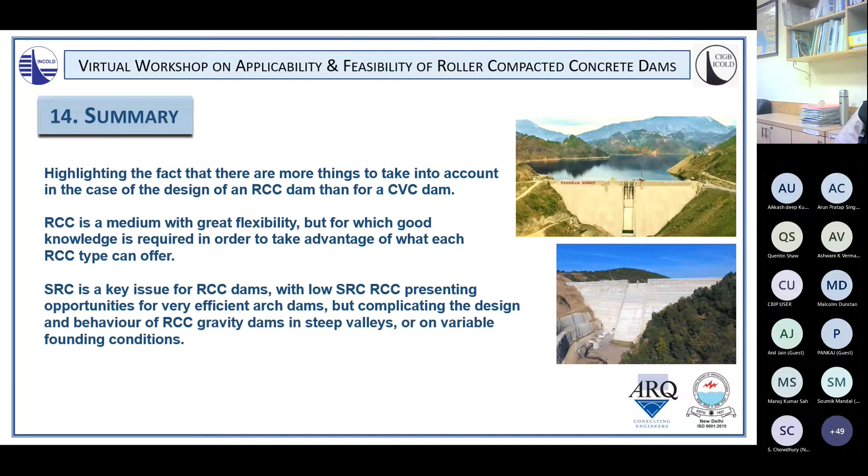Stress relaxation creep is a key issue for RCC dams, with low stress relaxation creep RCC presenting opportunities for very efficient arch dams, but complicating the design and behavior of RCC gravity dams in steep valleys or on variable founding conditions. Understanding the mechanisms of stress relaxation creep and its variability for different RCC types, an additional parameter must now be considered in the design of all RCC dams. And this parameter must be correctly addressed and modelled in all thermomechanical analyses for RCC dams.

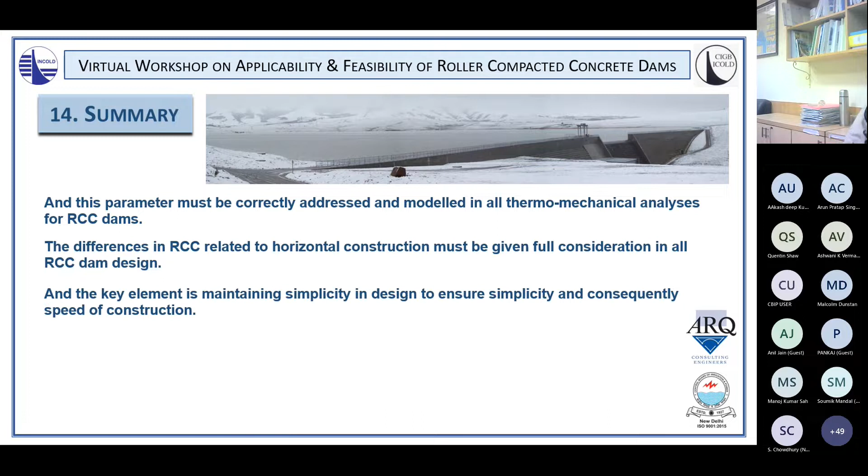The differences in RCC related to horizontal construction must be given full consideration in dam design. And the key element is maintaining simplicity in design to ensure simplicity and consequently speed of construction. It is substantially more difficult to successfully include inclusions within an RCC dam than is the case for a conventional mass concrete dam. Inlet outlet works need to be specifically designed for RCC construction, and careful thought and planning is required for spillway, galleries, and all other inclusions.

When you get it right, RCC dams and RCC dam construction are simple and straightforward. But it's perhaps due to its perceived simplicity that RCC dam construction so often goes so wrong, with probably less than 10% of all RCC dams having benefited from the real potential of this technology. An RCC dam will never be successful in construction unless consideration of construction is given the necessary attention in design. Simple RCC arch dams taking advantage of low stress relaxation creep and the consequential RCC pre-compression offer significant opportunity for efficient three-dimensional structures without the need to post-cool and grout joints before impoundment.

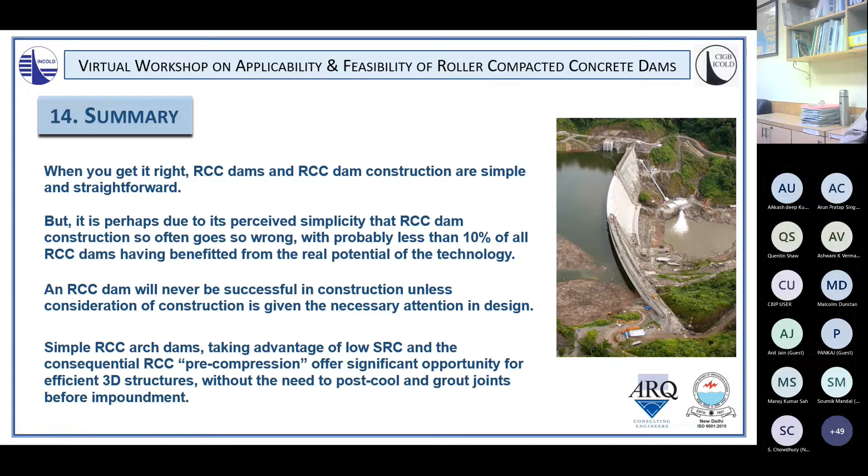Thank you, Dr. Quentin Shaw, for making an excellent and detailed presentation on RCC dam design. May we proceed further to the question and answer session? May I request the participants for their questions, please?

I have one question. Please, sir. The values shown for shear strength and tensile strength in the presentation, whether they are laboratory values or measured in the field.

Thank you for the question. In fact, those are very much indicative numbers. If you refer to Bulletin 177, you'll see that basically those numbers are guide numbers. In Malcolm Dunstan's presentation on RCC dam performance, you'll see a little bit more information on actual data that's come out from testing. But these numbers are just guide numbers to differentiate between the basic general properties in design. And in each design, it will be different. It's not just dependent purely on cementitious materials content. It's dependent on the nature of the materials, the aggregates as well.